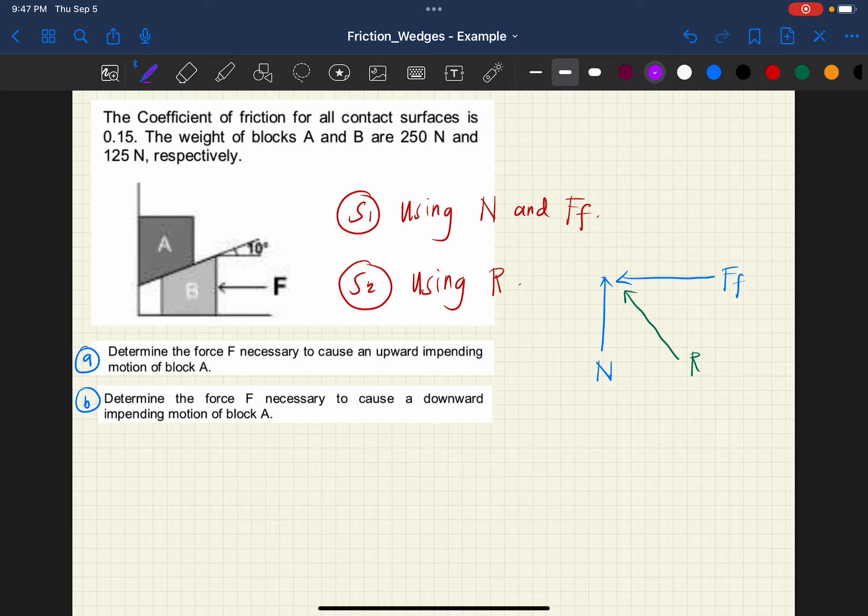Tandaan nyo, nag-e-exist yung resultant R na yan kapag meron kayong normal force na letter N. Ito yun, this is your normal force. Halimbawa, ito naman yung friction force nyo, this is your F sub f. Yung resultant ng normal reaction at saka ng friction force nyo ay nandito. At tandaan nyo class, nag-e-exist yan with respect sa normal force nyo, and meron siyang angle na angle phi, which is your angle of friction.

Yung ibang mga students dyan namamali, akala nila na yung resultant ng normal force at saka ng friction force na yan ay nag-e-exist with respect to friction force. Andito daw yan - that is wrong. Tandaan nyo class, na yung resultant ay laging nag-e-exist with respect sa normal reaction nyo or normal force. Okay? So gagamitin natin yung two solutions na to.

Ayan, pangit pala, alisin ko na. Anyway, let's analyze first yung problem natin. Medyo madugo yung problem na ganito, wedges - napakahaba kasi class talaga ng solution niya. Kaya i-introduce ko sa inyo yung mas maiksing solution, pero medyo kailangan nyo ng mabusising pag-analyze kapag gagamit kayo ng resultant. Pero mas maiksi talaga siya compared sa paggamit ng normal force at saka ng friction force. Pero tsaga-tsaga lang, masasolve nyo din naman siya.

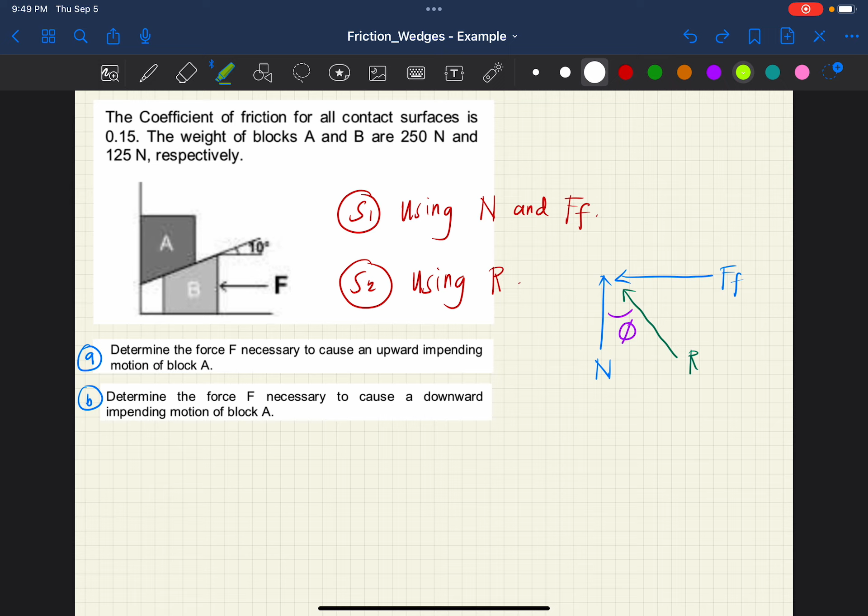Okay, so for this example, sabi dito, the coefficient of friction for all contact surfaces is 0.15. The weight of blocks A and B are 250 newtons and 125 newtons respectively. Ibig sabihin class ng respectively, magkasunod - kung ano yung unang ibinigay sa inyo, halimbawa yung block A, definitely siya yung merong weight na 250 newtons. Pangalawang ibinigay sa inyo, yung block B, definitely sa kanya yung 125 newtons. Ito yun, okay? So, ayan, hinighlight ko na.

For letter A, problem A, determine the force F necessary to cause an upward impending motion of block A. Ibig sabihin, hanapin daw natin yung value ng F na to, kung saan kapag itinulak niya yung block B, magkakaroon daw ng impending motion dito sa A na upward. Kumbaga, imagine niyo kapag tinulak ng F yan, yung block B, tataas yung block A na yan or wedge A na yan. Okay?

For letter B naman, determine the force F necessary to cause a downward impending motion of block A. Kumbaga, para bumaba yung block A na yan sa problem B natin, instead na patulak yung gagawin nyo sa F, babaligtad tayo ngayon. So pag-ganito yung force F nyo.

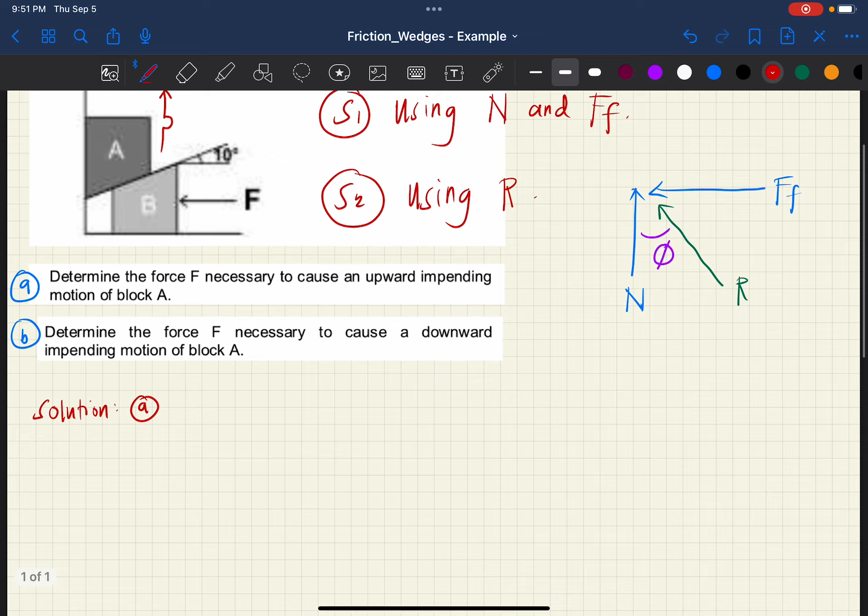Okay, so let's try. Unahin natin class yung problem letter A. So, solution for problem letter A. Solution A, o ayan. Imagine niyo class na itutulak ng force F na to, yung block B, tapos aangat yung block A na yan. I-expose natin lahat ng mga forces and frictions na nag-e-exist sa block A at saka sa block B, para mas madali yung pagsasolve natin. So i-drawing natin, sige. Ito yun yung block A. So ayan, drawing ko lang.

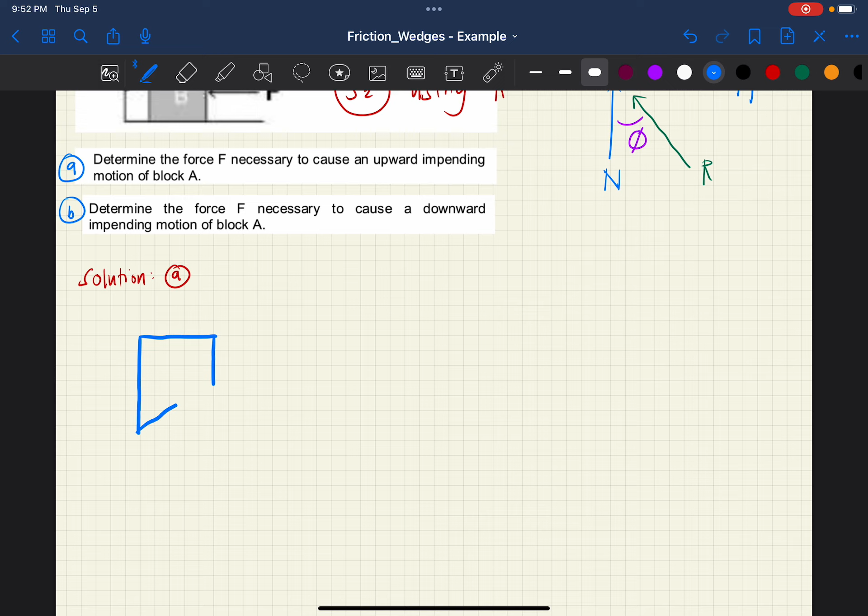Medyo habaan natin to. Tapos, ito yung block A nyo. Ayan, that's better. Tapos, nandito yung block B nyo.

Habaan natin para mas mukhang magsasalpak talaga sila. Ayan, this is your block A, yung nasa itaas. Imagine niyo class, kung pataas yung magiging impending motion niya or movement niya, sa tingin nyo, ano kaya magiging direction ng friction force niya? Kasi sa block A, dalawa yung contact surface nyo. Isa dito, at isa dun sa pagitan ng A at saka sa B. Whereas kapag tinignan nyo naman yung block B, ganun din. Isa yung contact surface niya sa baba at isa yung nasa pagitan ng block A at saka ng block B.

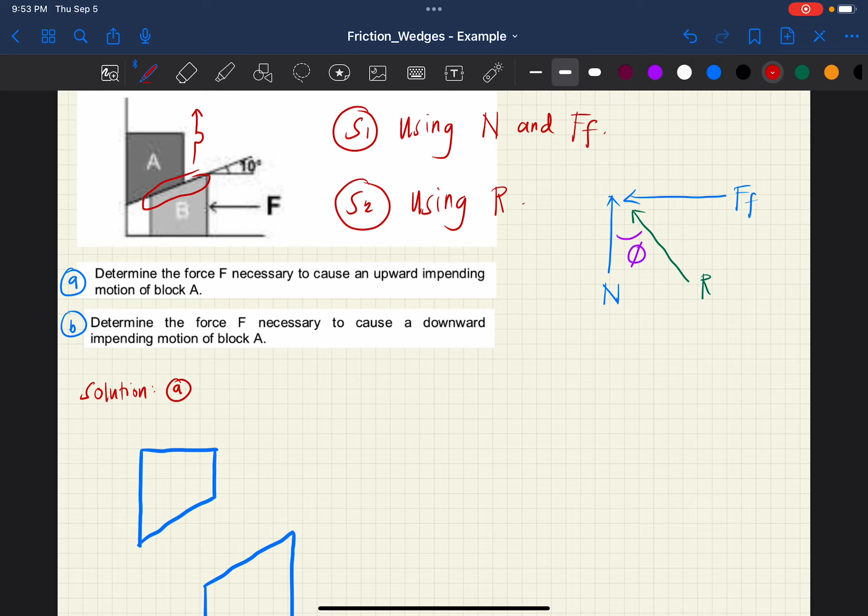Tandaan nyo, na ituro ko to sa mga students ko, kung ano class yung friction na nag-e-exist between yung nasa surface ng A at saka ng B, kung ano class yung friction na nasa A or nasa block A, paglipat nyo sa B, same friction lang yon pero opposite in direction.

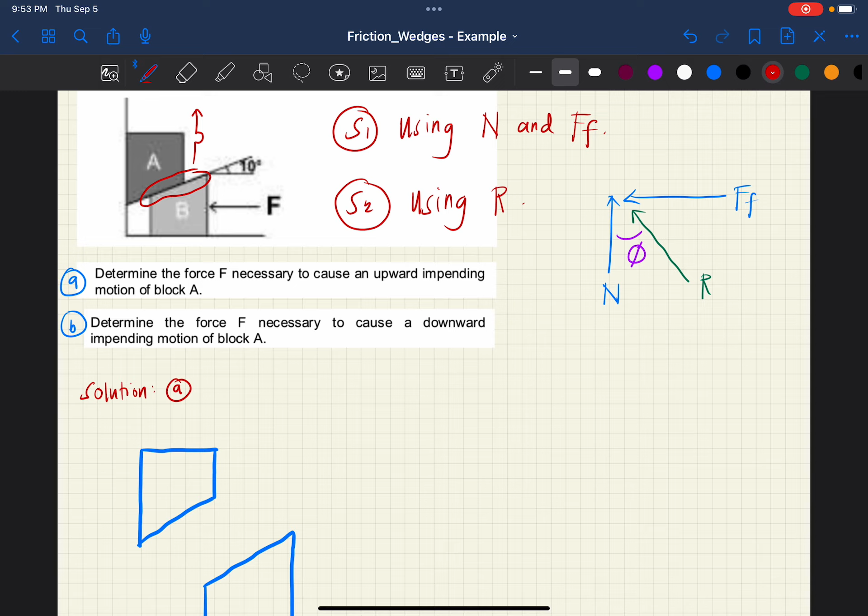So sige, ilagay natin, unahin natin pinakasimple. Pakilagay class yung normal reaction dito sa side ng A. Definitely, magkakaroon yan ng normal reaction na pag ganito. This is your, let's call this as your N1. Siyempre,

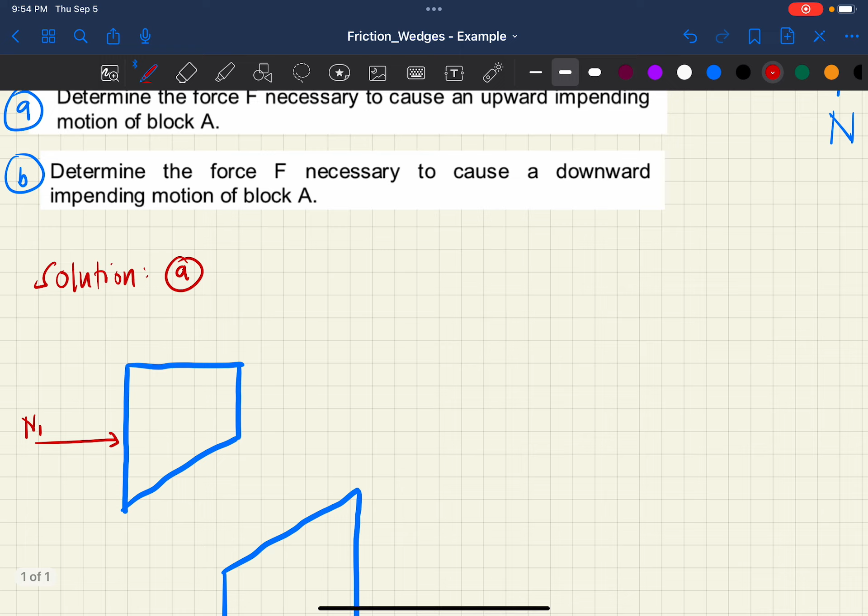kung pataas yung magiging movement nyo ng block A, so kung ang impending motion na to class is pataas, ito kasi yung impending motion niya, baguhin natin yung arrow. So pag ganyan, ito yung impending motion niya, pataas. Definitely, ano kaya magiging direction of friction force? Pababa. Let's call this as your F1. So ayan, let's call this as your F1 o small letter f na lang. That stands for friction 1.

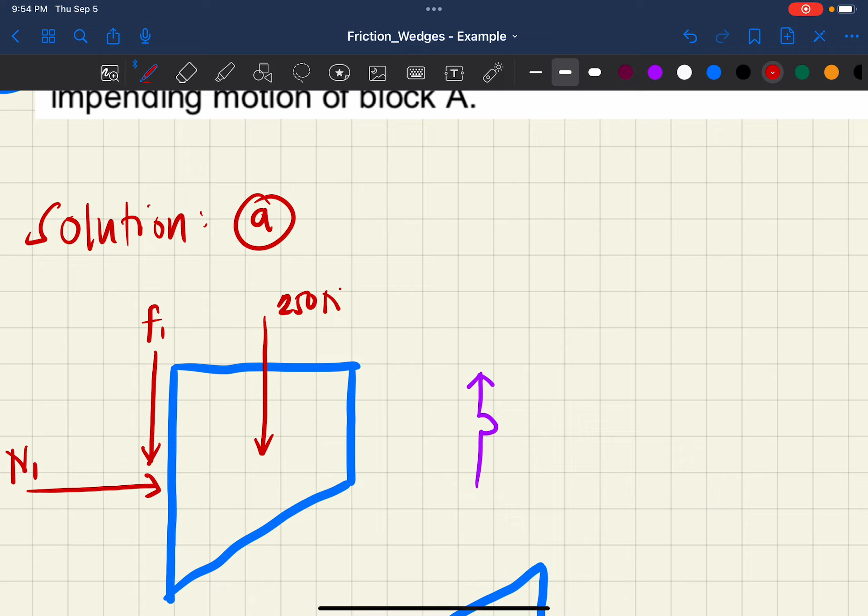Siyempre, hindi natin pwedeng kalimutan yung weight ng A, that is equal to 250 newtons. Next, syempre, kung tataas class yung movement ng block A nyo, definitely, ano kaya magiging direction ng friction force nyo?

Dito, sa pagitan ng A at saka sa pagitan ng B. Unahin natin dito sa surface at A. Normal reaction at A, between A and B, syempre perpendicular. Let's call this as your N2. Tapos, ilagay natin, i-project natin para hindi kayo malito. Kung pataas pala yung magiging movement ng block A, definitely class, magkakaroon yan ng friction force between the surface of block A and B. Let's call this as your F2.

Yan na. At syempre, kapag pinroject nyo rin ito, magkakaroon siya ng angle. Anong angle kaya dito? Ano yung angle na binigay? 10 degrees. So kapag pinroject nyo, this will be 10 degrees. Ito rin, this will also be 10 degrees.

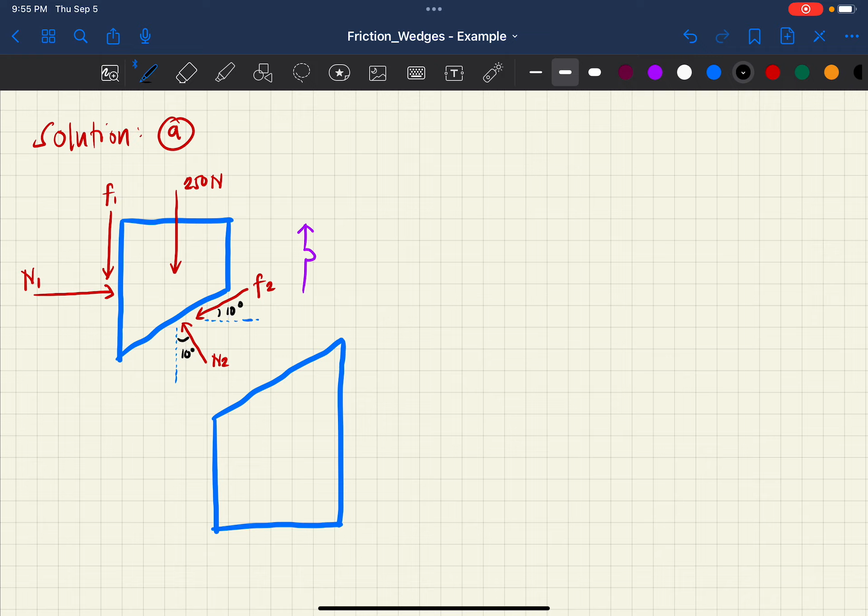Proceeding, meron pa ba na nag-exist dapat sa block A? So I don't see any, parang wala na. Lipat tayo ngayon dito sa block B.

Unahin natin yung normal force na nag-exist dito between the surface of block A at saka ng block B. Tandaan nyo, kung pataas ito sa surface A, definitely pag nilipat nyo yan dito, pababa na yan. Pero same, that this is N2.

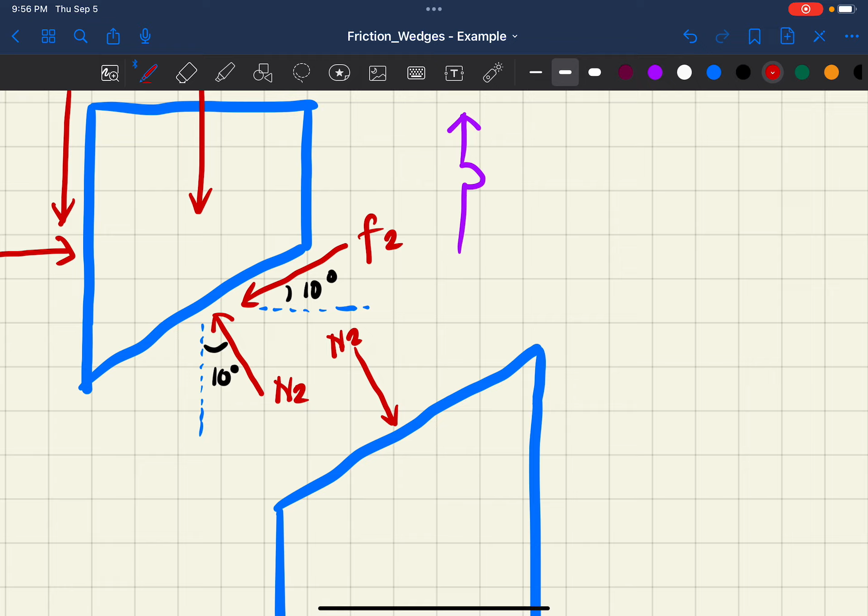At di ba, ang impending motion ng force nyo, since itutulak yan, itutulak ng force F. Yan, itutulak yan ng force F. Definitely, yung friction force nyo dito, F2, is magiging to the right. Kasi to the left, yung direction ng force nyo. Let's call this as your F2. Ayan na.

Siyempre, i-project din natin yung mga angles na meron dyan. Project nyo to pataas. And i-project nyo to horizontally. This will still be 10 degrees. And ito, ganun din, 10 degrees. Hindi nyo rin class pwedeng kalimutan yung weight ng block B, which is equal to, dito na yan, which is equal to 125 newtons.

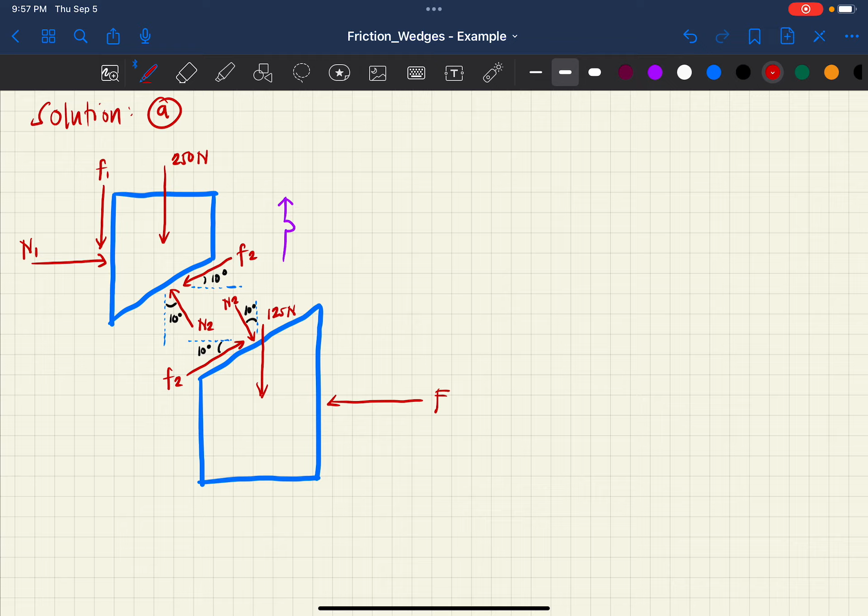Next, meron pang nag-exist dyan, hindi nyo lang nakikita yung force na nasa ilalim. Ibig sabihin, yung friction force at saka normal reaction na nasa ilalim ng block B. Since ito yung block A nyo, lagyan nga natin ng label, and this is your block B. Pagka in-expose nyo class yung forces, friction force at saka normal force na nag-aak sa ilalim ng block B nyo, definitely magkakaroon yan dito. Let's call this as your N3, normal reaction 3 na yan.

At since to the left yung force o applied force nyo, definitely yung friction force sa ilalim ng block B nyo is to the right. Let's call this as your friction number 3. O diba, ang saya, sobrang dami ng forces na yan. Pero lalabanan natin yan, so solvein natin yan.

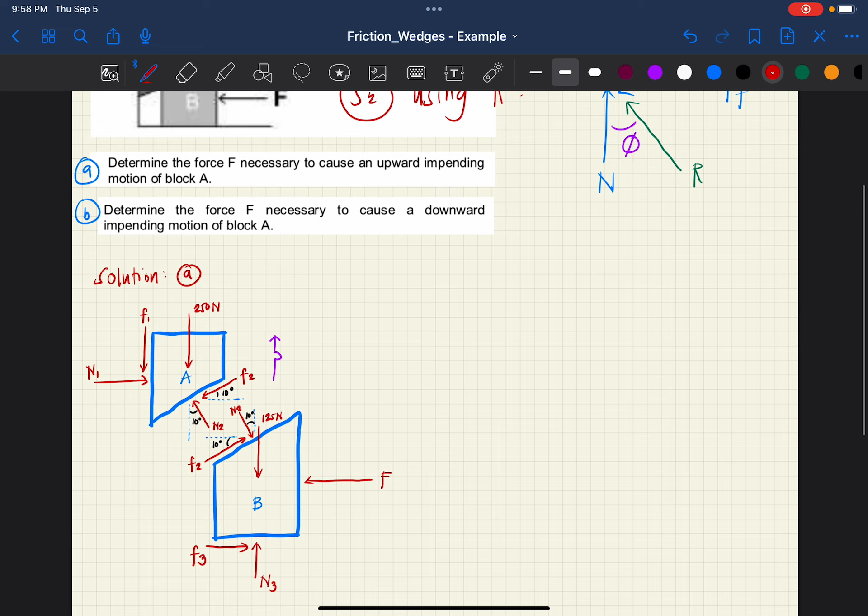First step na kinakailangan nyo gawin, hindi nyo naman kasi class pwede pagsabayin na FBD ng dalawa, gumamit tayo isa-isa lang. Unahin natin class, FBD muna. At block A muna tayo. Kasi syempre, pataas, papababa yung gagawin natin at block A. At saka kung mapapansin nyo, mas kakaunti yung mga forces na nag-act.

Parang parehas lang pala. I mean, oh yes, mas konti pala yung forces na nag-act sa block A kasi wala naman sa kanya yung force F na yan. So, definitely, sa block A tayo mag-i-start.

At block A, taking summation ng forces along x-axis is equal to 0. So, paki-note class na nasa block A lang tayo. Mag-focus tayo sa block A only. Ano-ano class yung mga horizontal forces na nag-act dyan? Ang gagamitin natin na x-axis is pag ganito, x and y-axis. Yung normal lang, this is your y-axis and this is your x-axis. Okay? So, para hindi kayo malito.

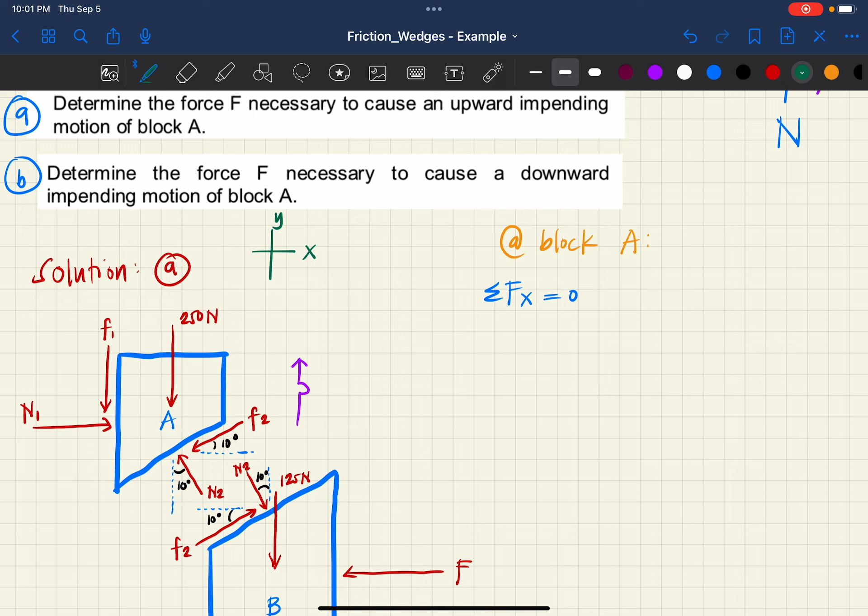Pero, there are instances na pwede nyo kasi class gamitin yung x and y axis na nakapaganyan. Pero in this instance, mas madali kung gagamitin natin yung usual lang or yung normal lang.

So, sige. Ilagay nyo class lahat ng x forces na nag-act sa block A. Unahin natin N1. So, nakikita ko positive N1 yan. Next, minus F2, sine or cosine? Negative F2, that is cosine 10. Next, ano pa? Yung N2. That is negative kasi upward to the left yan. So, this is minus N2, and that is sine 10 degrees. Meron pa ba? So, parang wala na.

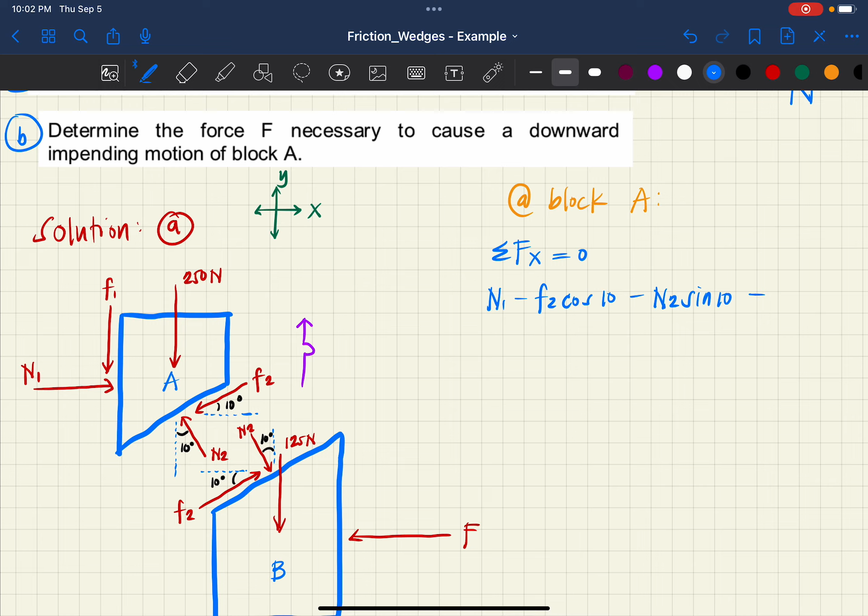Is equal to 0. Tandaan nyo na ang formula ng friction force natin or pagkuha ng friction force natin, F of F is equal to mu n. So, ito class yung formula na kinakailangan nyong tandaan and hindi pwedeng kalimutan sa friction.

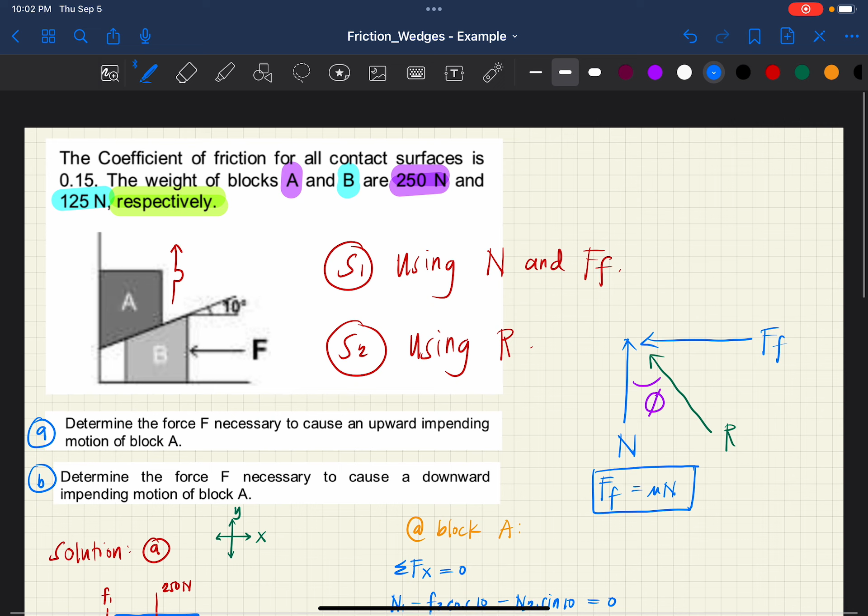So, palitan nyo to class, that this is N1 minus F2. Palitan nyo class. Ano yung coefficient of friction natin? Sabi, 0.15 sa lahat daw ng surface. So, palitan nyo to. This is now 0.15 N2 cosine 10 minus N2 sine 10 is equal to 0.

Simplifying, combining like terms, paki-combine class yung dalawang N2. This is now equal to N1. Pag-combine niyo class yung dalawang equations na merong N2. So, pag-combine natin, this is now equal to negative 0.15 cosine 10 minus sine 10. So, ayan. This is now equal to negative 0.3214. Ayan. Negative. So, lagay ko lang. This is negative 0.3214. And then, N2 is equal to 0.

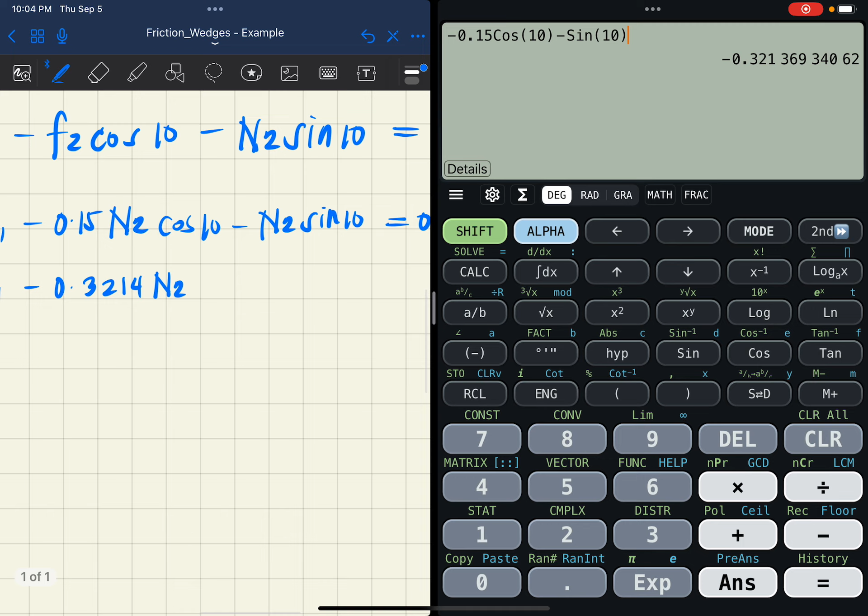Since dalawa pa rin yung unknowns nyo, isang N1 at saka isang N2, let's denote this as equation number 1. Ayan. So, lagay ko, palitan ko na lang ng arrow. Let's denote this as equation number 1.

Next, taking summation ng forces along y-axis tayo, still under block A tayo. Ayan. Ilagay nyo class lahat ng forces na nag-act in y-axis. Unahin natin class yung N2. Positive kasi upward yan. Therefore, that is N2. Tapos, sine or cosine? This is cosine 10. Nakikita ko cosine 10 yan.

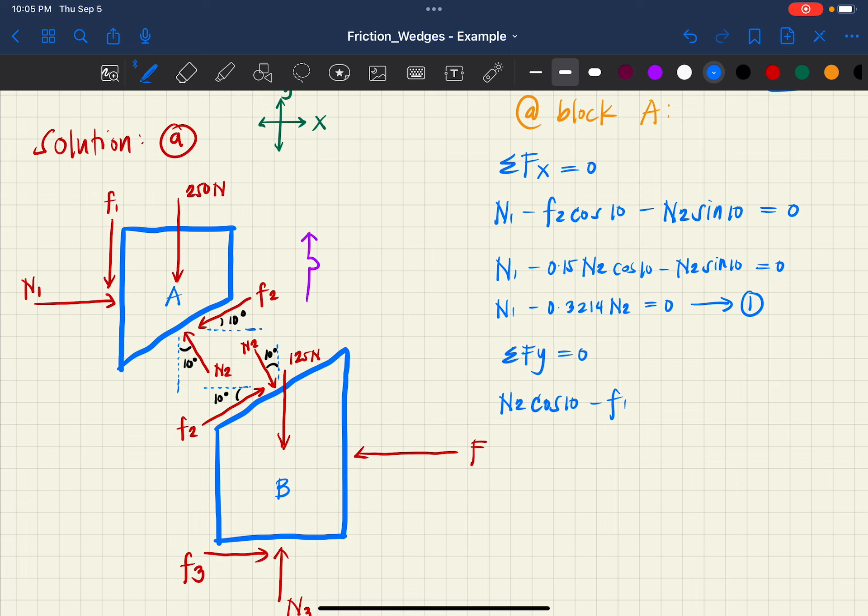Next, what about yung F1? That is negative F1 kasi downward yan. Yung 250, that is negative 250. Ano pa? Yung F2, negative F2. And that is sine 10 degrees. Meron pa ba? Parang wala na. 1, 2, 3, 4. Apat lang yan is equal to 0.

Simplify, tapos palitan nyo class yung F1 at saka F2 ng mu n para ma-expose natin or matira na lang sa equation nyo is N1 at saka N2. So, therefore, N2 cosine 10 minus, this is 0.25 or 0.15 pala, 0.15 N1 minus 250 minus 0.15 N2 sine 10 is equal to 0.

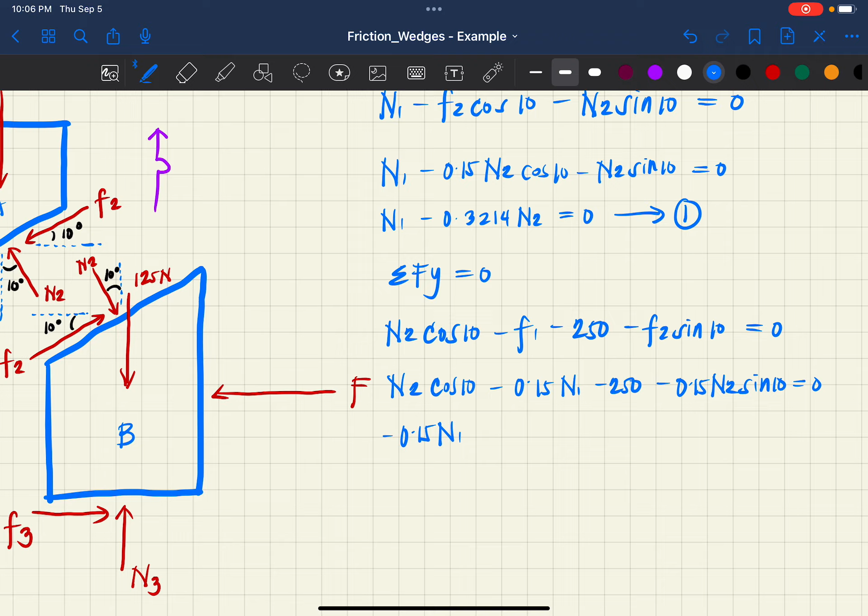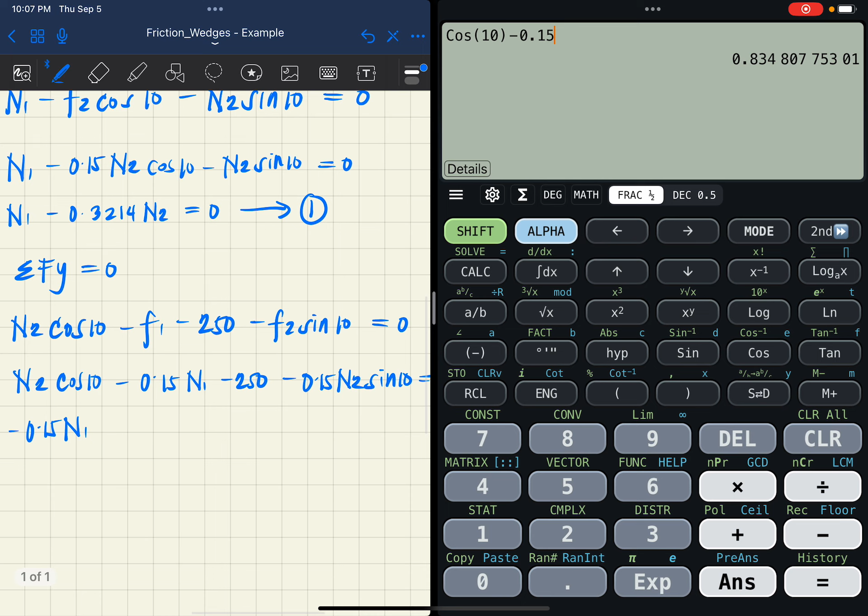Combine like terms, kagaya ng ginawa natin kanina. This is now equal to negative 0.15 N1. Pag-combine niyo class yung dalawang N2 natin, that is cosine 10. Yung coefficients lang ilagay nyo ha, cosine 10 minus 0.15 ng sine 10. That is 0.9588. This is positive 0.9588 N2. Tapos ilipat nyo class sa kabilang equal sign, sa kabilang side ng equal sign, yung 250. This now becomes positive 250. Since dalawa pa rin unknowns nyo, let's call this as equation number 2.

Alam ko, tinuro ko na sa inyo, specifically sa mga students ko, kung paano mag-solve ng equations 1 and 2. So, using mode equation, using equation 1 and equation number 2, mode, pindutin nyo class sa calculator nyo, mode equation, and then 2 unknowns.

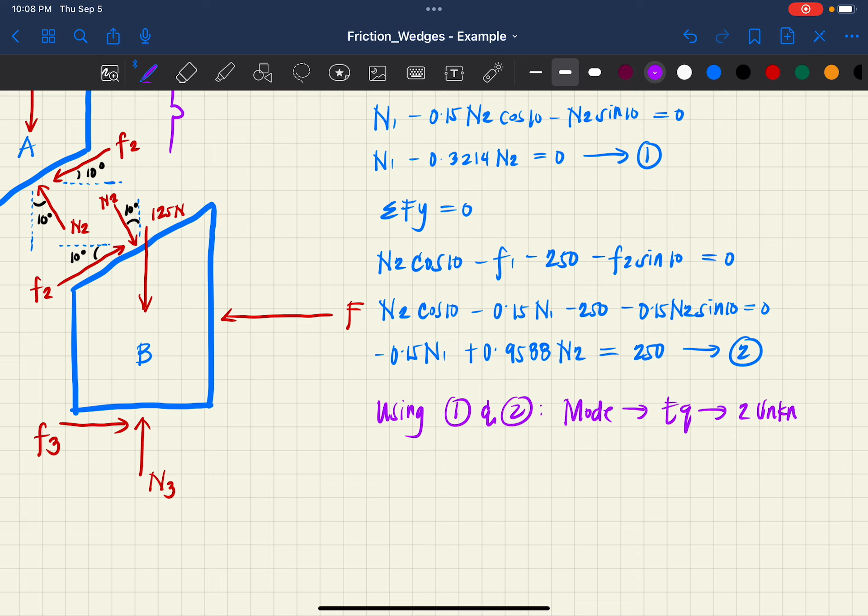Ayan, 2 unknowns. So paano gagawin nyo? Pindutin nyo class muna yung calculator nyo, mode equation, 2 unknowns. So gagawin ko rin dito, asa ng mode? That is mode equation. Ito, solve system equations, 2 unknowns.

Kunin nyo class yung equation number 1 at saka equation number 2 nyo. Dapat tapat-tapat yan. Unahin nyo class yung coefficient ng N1. Andito tayo. Ang coefficient ng N1 is 1 equals. Ang coefficient ng N2, ilagay nyo yung lahat na yan, negative 0.3214 equals. And then yung constant, 0 equals.

Next, equation number 2, ito yun. Coefficients lang din. Negative 0.15 equals, positive 0.9588 equals, and then yung constant, that is positive 250. Equals nyo, ang lalabas sa N1 that is 88, nalagay ko.

N1 is equal to 88.2395. What about N2? Equals nyo ulit, bibigay yung susunod, that is 274.5473. Ayan, newtons. Parehas newtons yan. So, newtons.

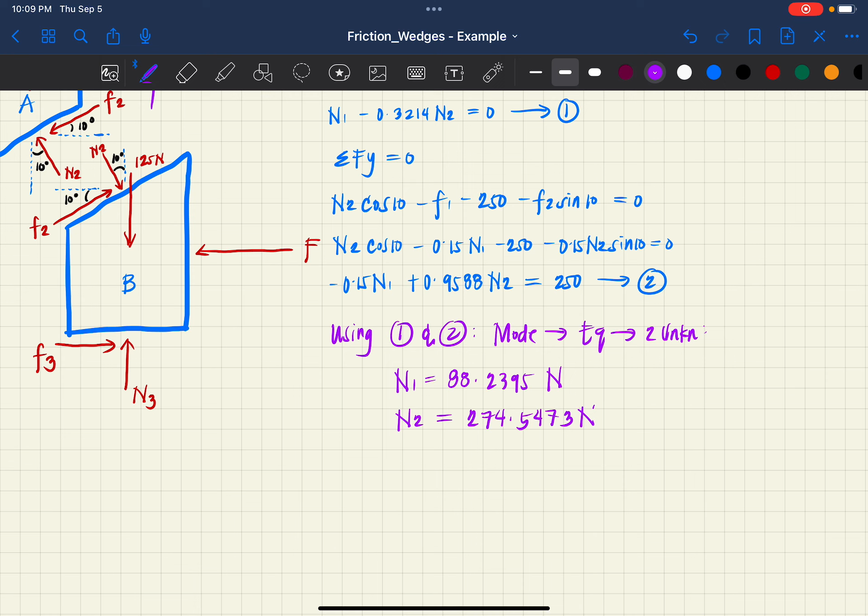So ayan, nakuha na natin N1 at saka N2. Pwede na tayo class mag-proceed sa block number 2 or block B. So sige, at block B na tayo. Dito tayo, medyo mahaba kasi ito.

At block B, ayan. Ganun pa rin, taking summation ng forces along y-axis muna tayo, equal to 0. Ano-ano kaya class yung mga y forces na papasok under block B? Block B lang yung pakialaman nyo. Mamaya tayo sa A ulit sa problem B. Pero tingnan kayo sa block B, ano-ano yung mga y forces na nandyan.

Unahin natin yung N3, that is positive N3. Yung N2, negative yan, that is negative N2, and then this is cosine 10 degrees, kasi downward na siya eh. Diba? Yung weight na 125, negative 125. Yung F2 natin, that is positive F2, and that is sine 10 degrees na to.

Meron pa ba? So 1, 2, 3, at saka 4. Apat lang naman yan, so wala na. This is now equal to 0. Since may nakuha na tayong value ng N2, palitan nyo na class yung N2 na yan at saka yung F2 na yan. Okay? This is now equal to N3 minus 0.15.

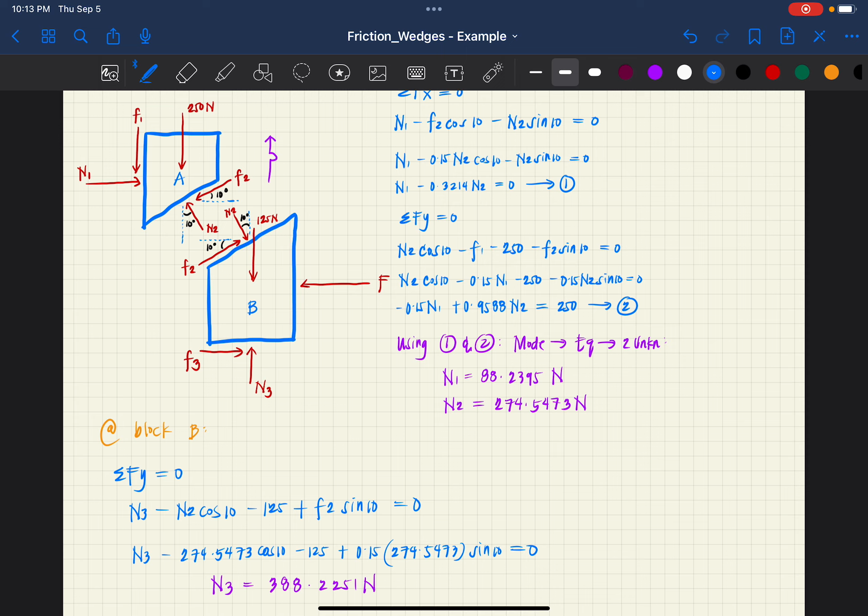Along x-axis na tayo, equal to 0. Nakikita nyo na ba yung mangyayari? Papasok na class dyan yung F, and by that, pwede masasolve na natin yan kasi meron na kayong normal reaction 3. Ano-ano yung mga y-x forces na papasok at block B pa rin tayo?

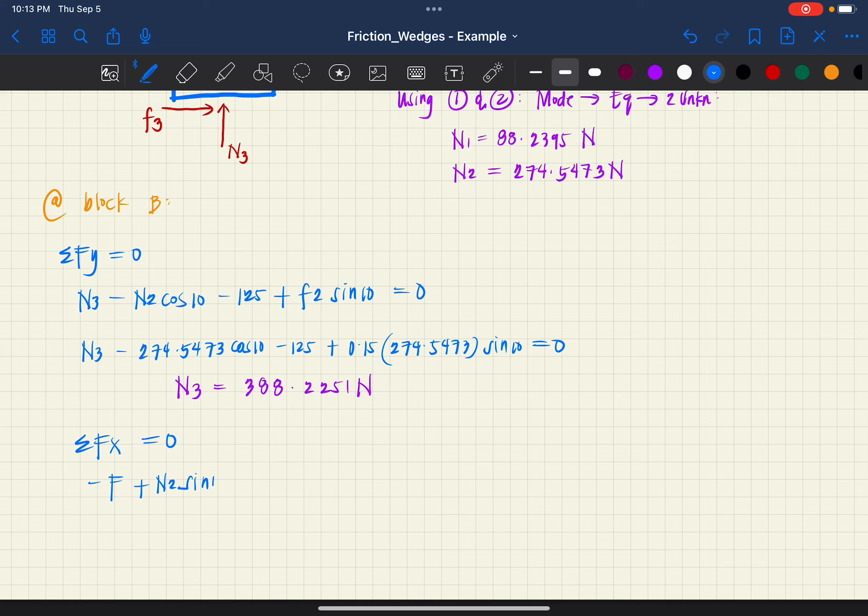Unahin natin F, that is negative F. Next, yung N2, positive, that is positive N2, and that is sine 10. What about yung F2? Is still positive yan kasi upward to the right yan, to the right pa din yan, that is positive F2, and that is cosine 10.

Next, yung F3 natin, that is positive F3. Meron pa ba? 1, 2, 3, 4. Therefore, this is now equal to 0. Substitute nyo class lahat ng mga alam nyong values. This is negative F plus what is N2 na nakuha nyo? Ito. This is 274.5473 sine 10 plus F2, that is 0.15 N2.

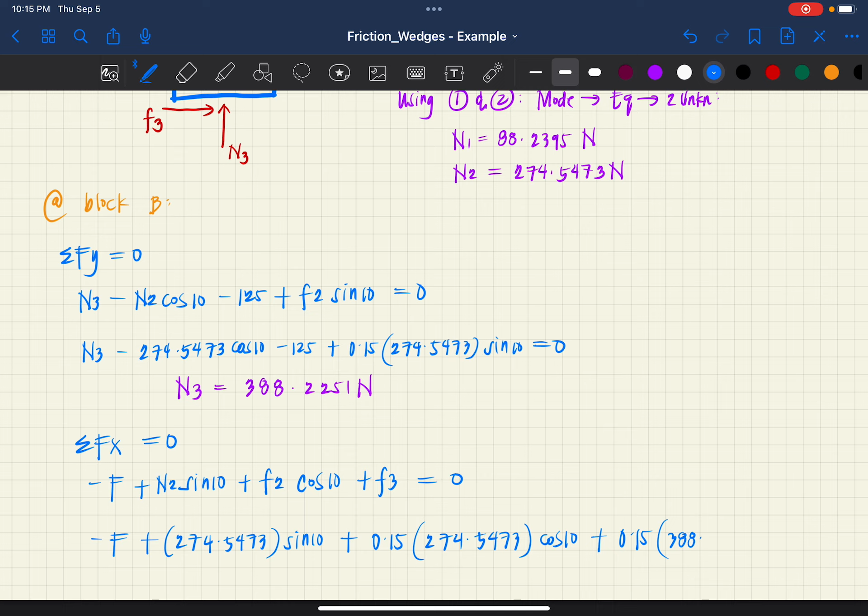What is N2? Ito yun. Still 274.5473 cosine 10, and then plus F3 is still 0.15 yan, pero this time N3 na kasi F3 na yan. 388.2251 is equal to 0.

Lipat tayo. Therefore, what is F? F is equal to calci ulit. Medyo mahaba yan. Calci nyo, lipat nyo class yung F kasi negative siya. Tapos iwanan nyo lahat yan para sa F. And then input nyo as is.

274.5473 sine 10 plus 0.15 times 274.5473 cosine 10 plus 0.15 times 388.2251. Ayan. Therefore, force F is equal to 146.4649.

So therefore, F is equal to 146.4649, and this is newtons. Ito class yung final answer natin. This is your final answer.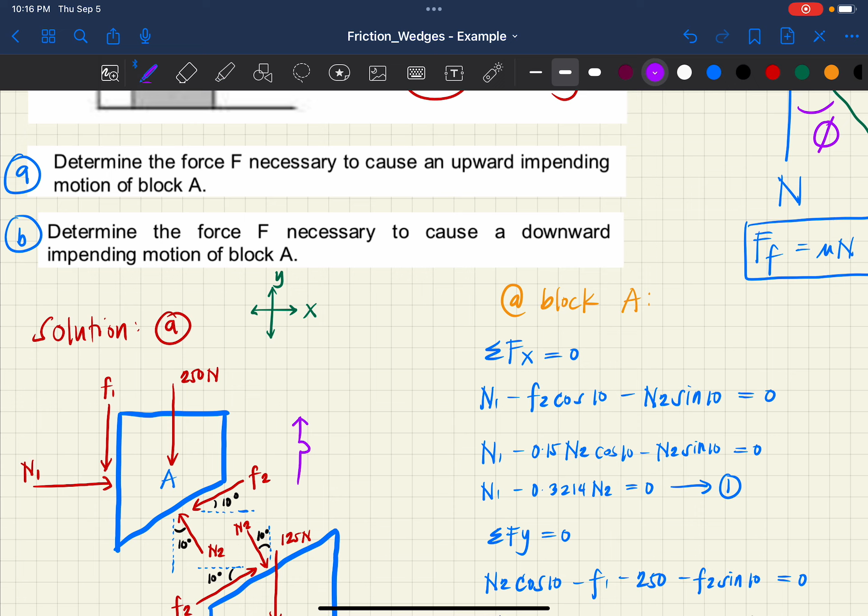This is for solution number 1. Solution number 1. Let me place it here. Solution 1, S1. There, that's okay.

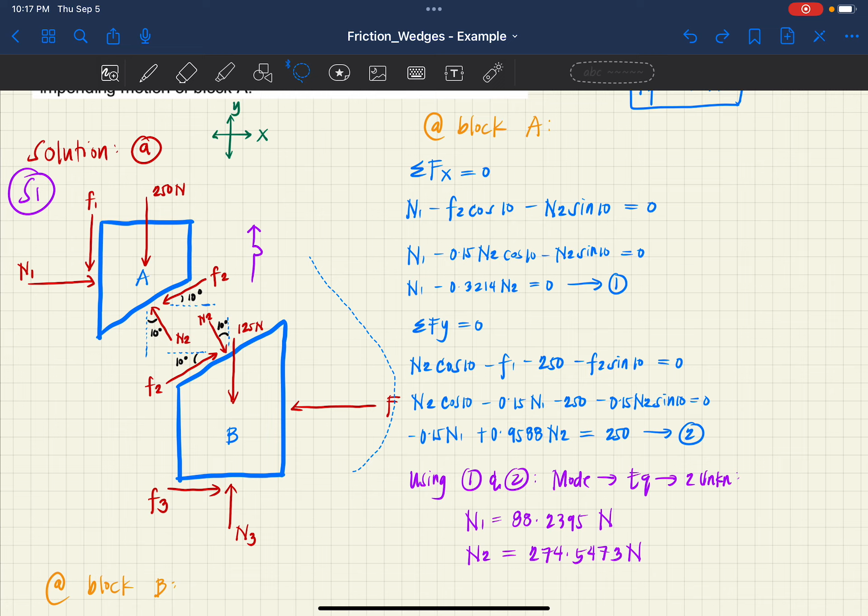For solution number 2, using resultant R, using resultant of N and friction force. For solution number 1, we used N and F of F. Let me bring this down so I can note it too.

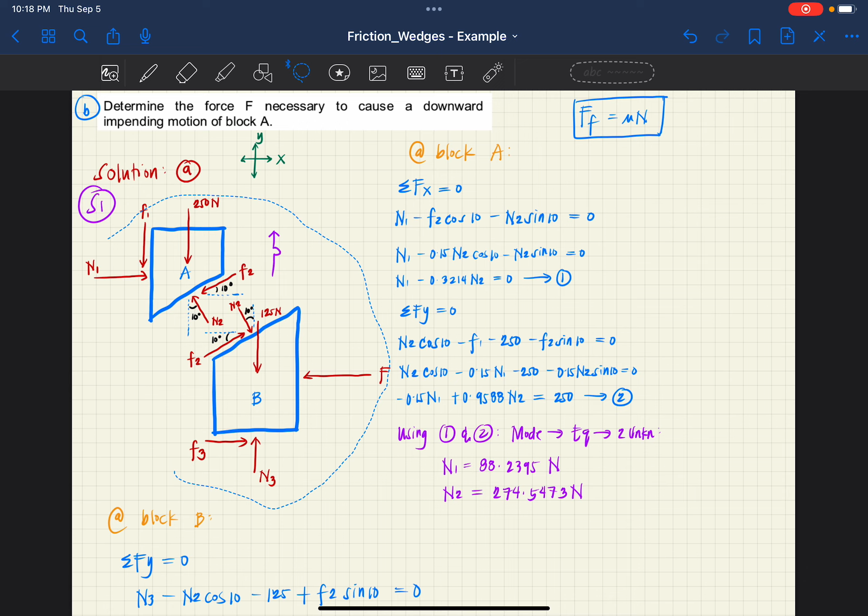Oh, this wasn't included. There, that's done. Using N and friction force, F of F, there. In this case, we need to redraw it.

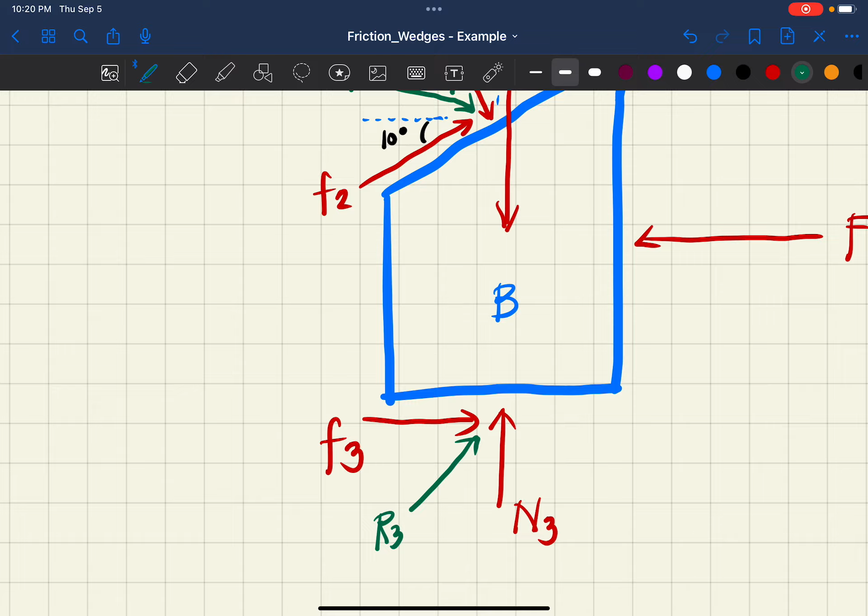If you listened last time to our discussion, I discussed that the formula for getting the friction force, if the coefficient of friction is not given, is tangent of angle phi equals coefficient of friction. Therefore, you can rearrange it, so to get angle phi, it is now equal to inverse tangent of the coefficient of friction.

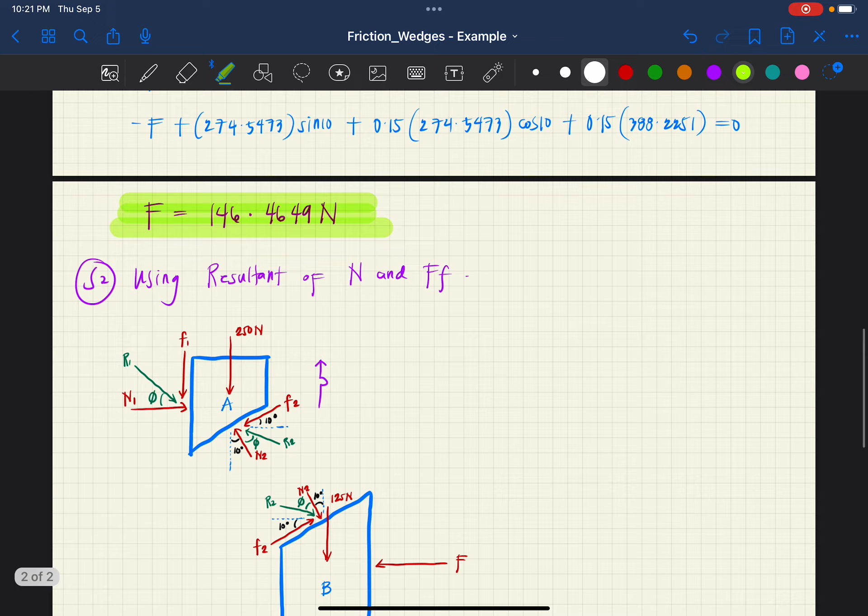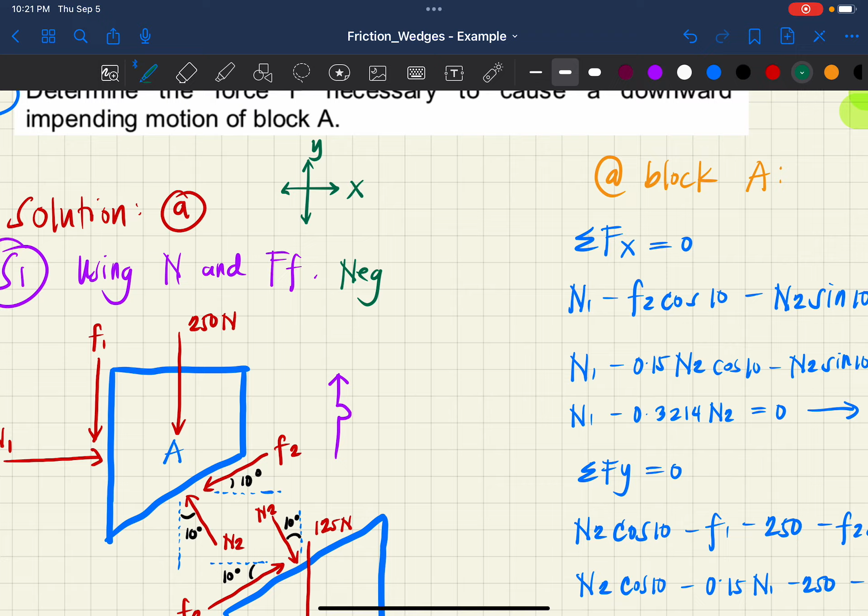Here, on the other hand, neglect the R, neglect the resultant first. So, let's go back here. First things first, to get angle phi, let's place it in between them. To get angle phi, the formula is inverse tangent of the coefficient of friction.

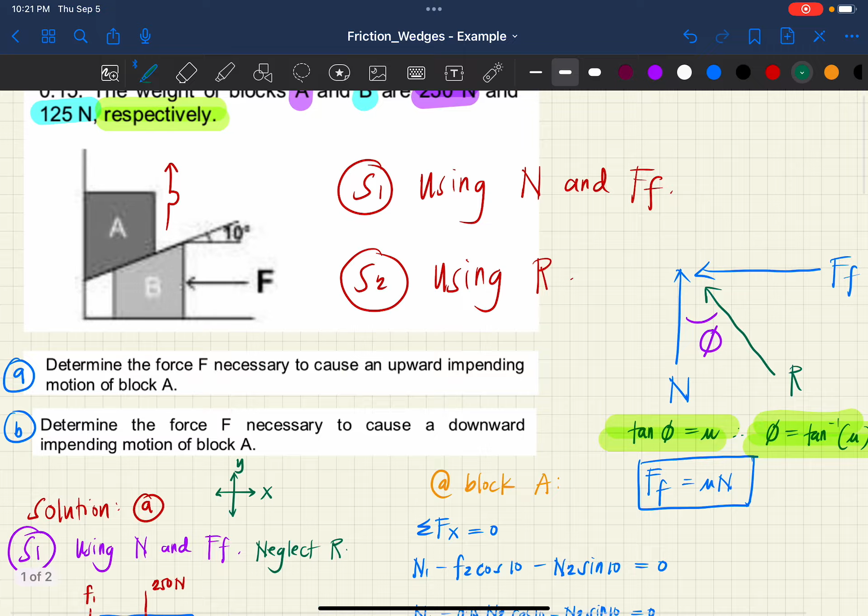You already know the coefficient of friction given in the problem, that is 0.15 for all contact surfaces. We'll prove that the final answer should be the same. If there's any discrepancy, it should only be in the decimals. Inverse tangent of 0.15, therefore angle phi is now equal to, let me get the calculator.

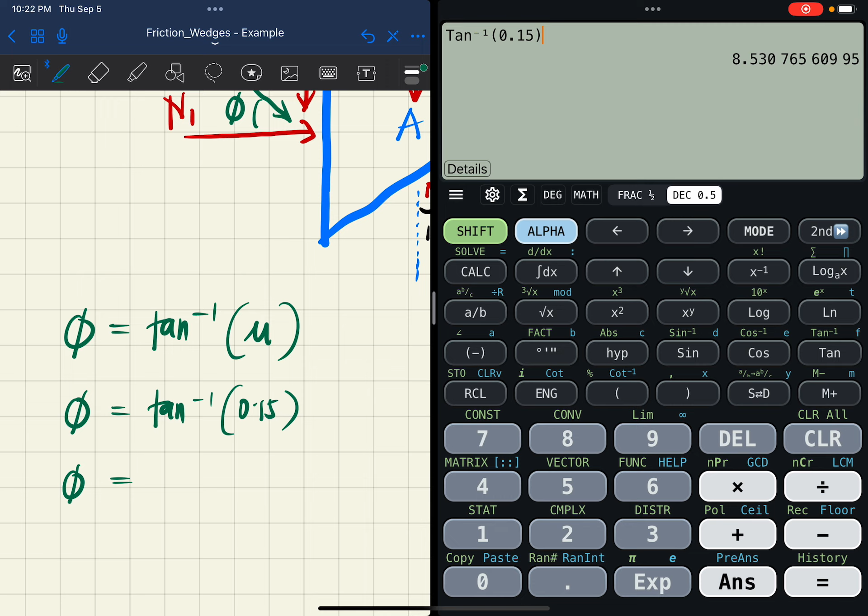So this is shift tangent of 0.15. This is 8.5308 degrees. Actually class, you can use just 2 decimal places.

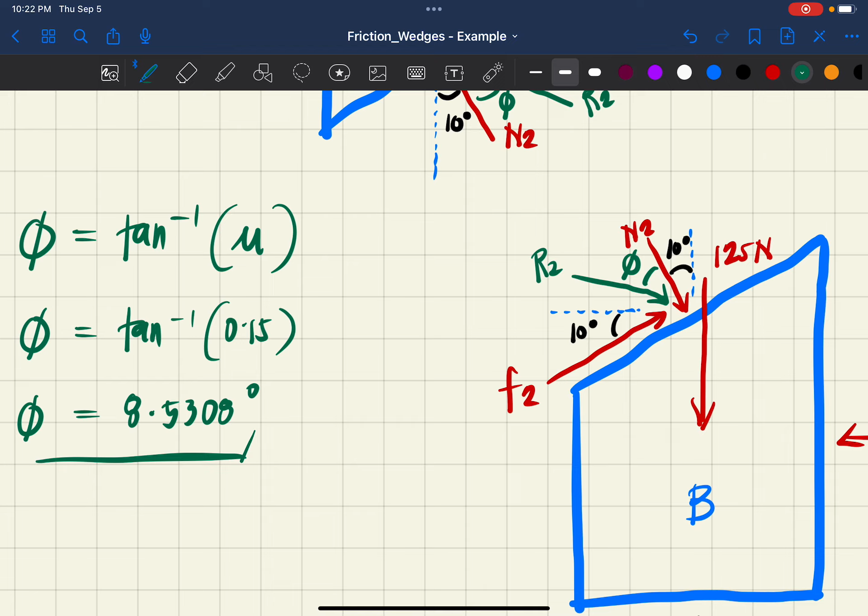We're still on block A. Instead of using the normal force N and the friction force F, small letter F, or F of F, what we'll use this time is R1 and R2. So, block A first. Let's start with block A.

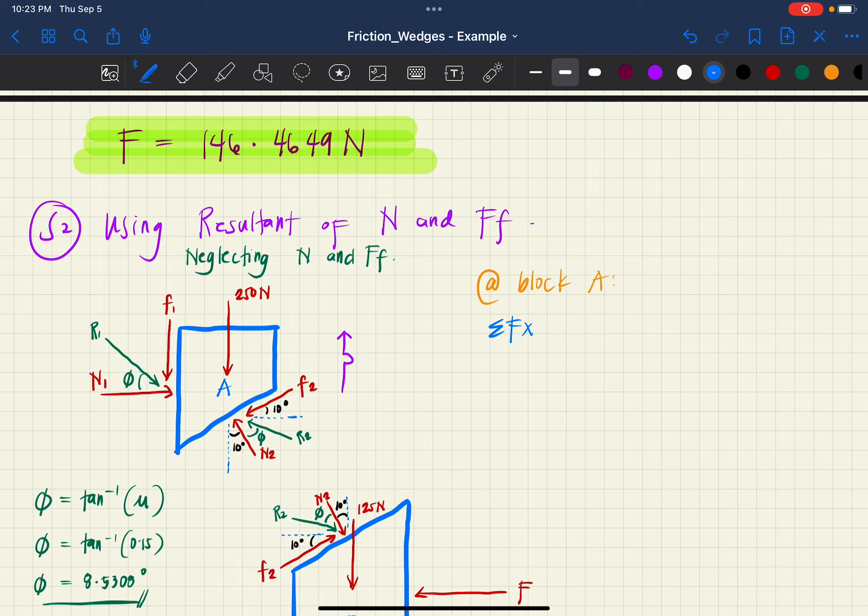At block A, taking summation of forces along the x-axis is equal to 0, or y-axis, whichever you want to start with, class. It doesn't matter, kasi masasolve nyo rin naman yan. Ano-ano kaya class yung mga x-forces na nag-a-act dyan?

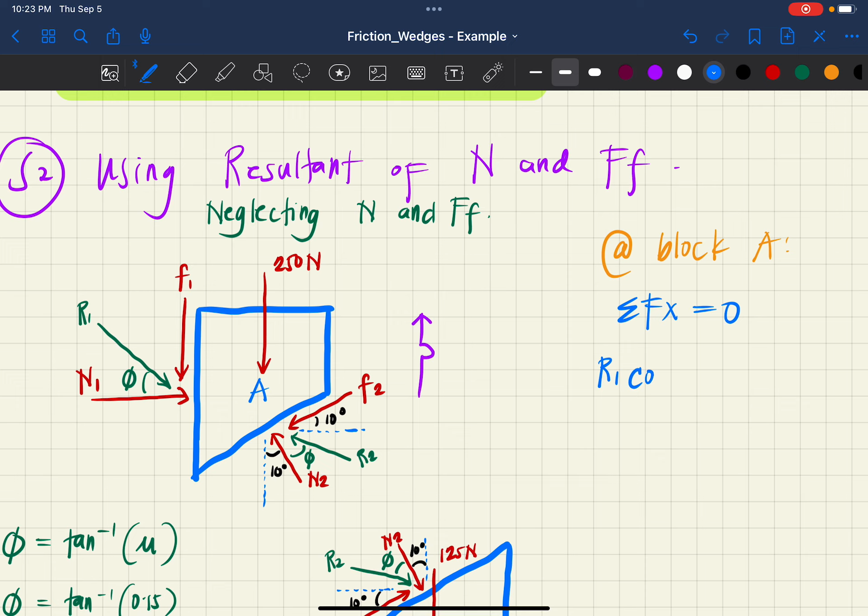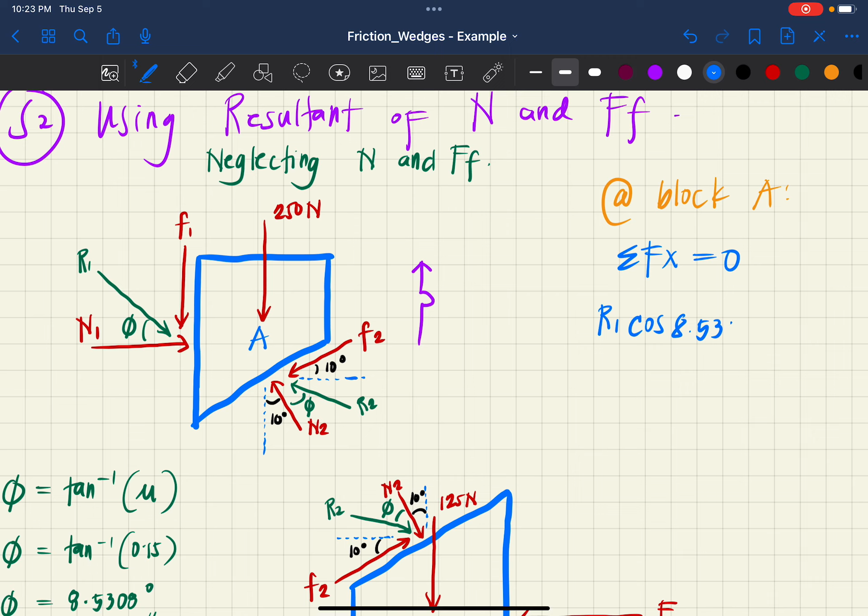So unahin natin yung R1. That is positive kasi to the right yan, R1. Tapos yung angle niya, sine or cosine? Ang nakikita ko is cosine phi. Ano ba ang cosine nyo? Ano ba ang phi nyo? Cosine 8.5308. Or ilagay na lang natin na cosine phi, mamaya na lang natin i-input sa calculator. So ayan, next.

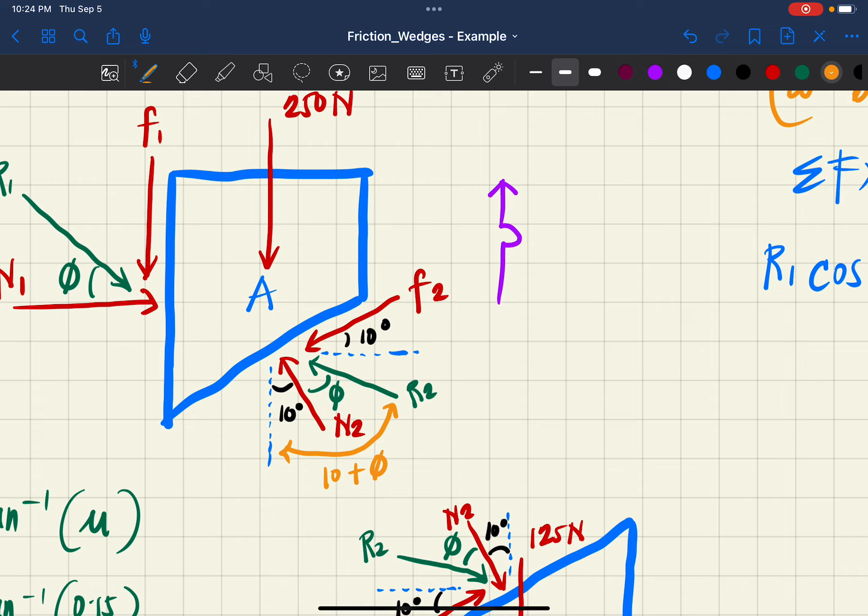Yung R2, R2 na lang papasok dyan kasi neglect na nga class yung N2 at saka yung F2. Huwag nyo nang pansinin yan. R2 na lang. Pero tandaan nyo, kapag kinuha nyo yung horizontal component niyan, ang angle niyan buo, eto, and this is equal to 10 plus angle phi. Okay? So ayan yung angle niya. Medyo dun lang siya nakakalito, pero at the same time mas maiksi siya. This is minus R2 sine or cosine.

So ang nakikita ko is sine. Sine ng angle phi plus 10 degrees is equal to 0. O, di ba? Kung i-compare nyo kanina, nung nag-block A tayo, ang nag-exist dyan, 3. Pero nung sinimplify nyo, 2 na rin siya. Pero in this case, 2 lang talaga siya. Since wala kayong nakuha, let's call this as equation number 1. Ganyan siya, very direct to the point lang.

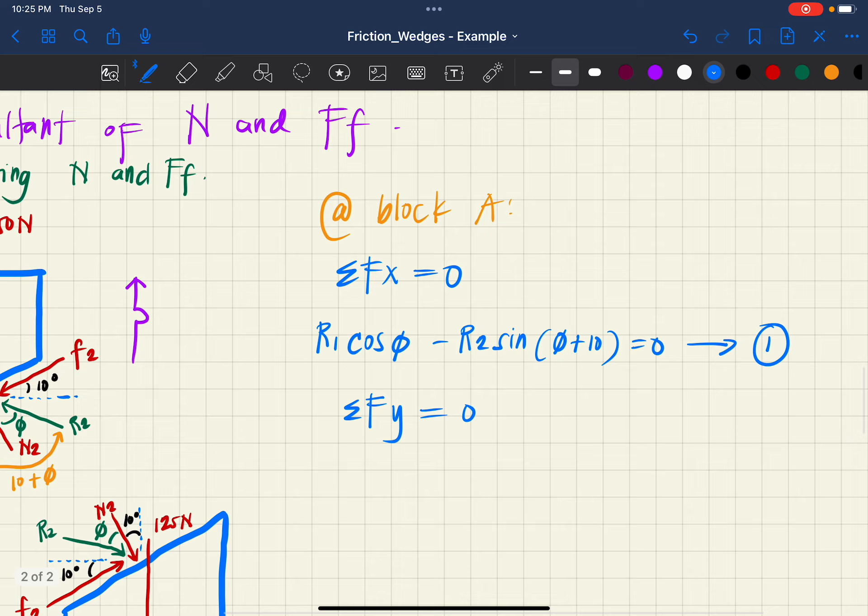Next, taking summation of forces along the y-axis is equal to 0. Ganun pa din, ang i-consider lang natin R1 instead of N1 at saka F1, tapos lahat ng other vertical forces. R1, that is negative. R1, in this case, this is sine phi 250, that is negative 250. R2, that is positive kasi upward na yan. Positive R2. And in this case, this is cosine phi plus 10.

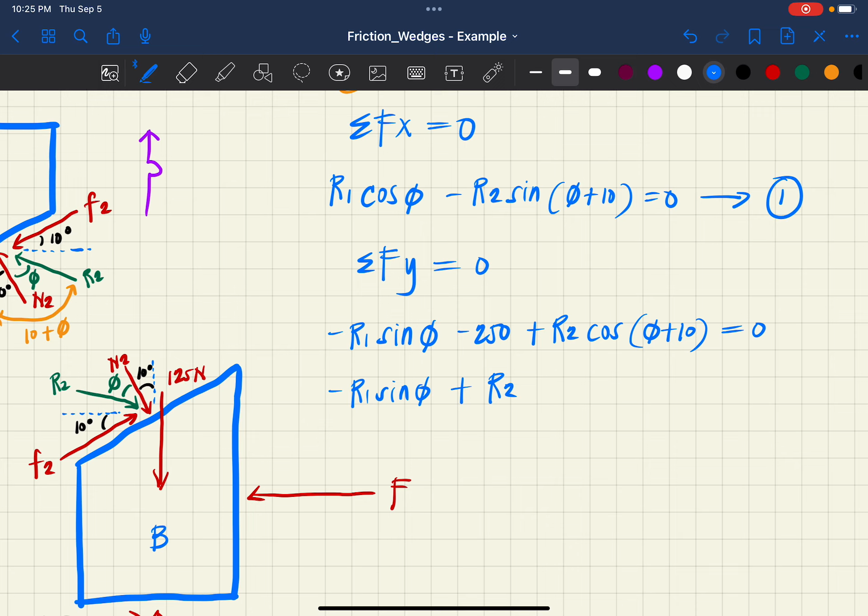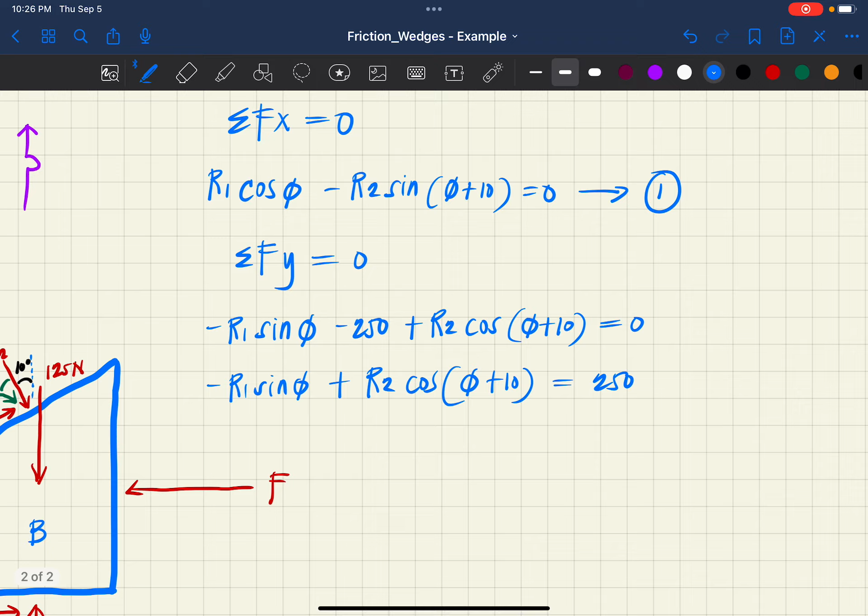And this is equal to 0. Simplifying, rearrange nyo, tapos ilagay nyo sa kabilang side ng equal sign yung constant. This is now equal to negative R1, tapat-tapat, sine phi plus R2 cosine phi plus 10 is equal to positive 250. Let's call this as equation number 2.

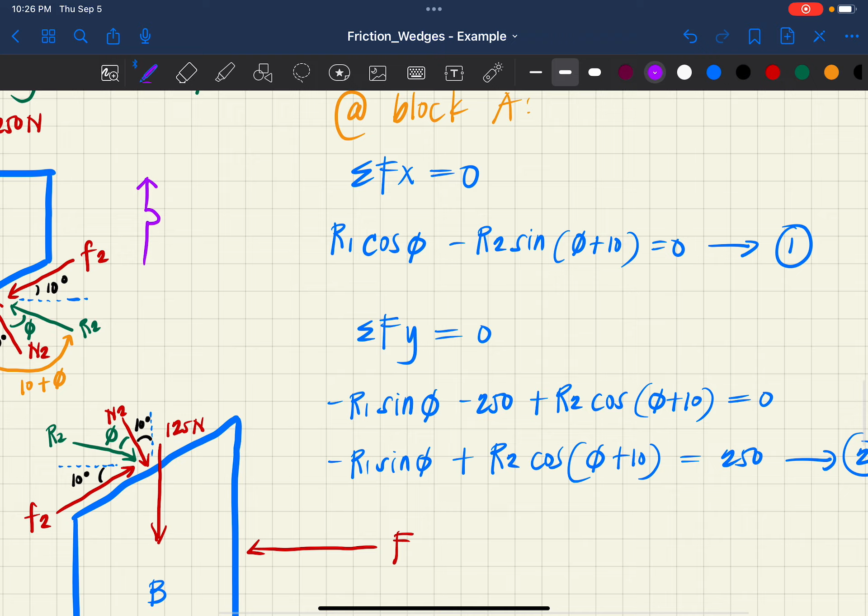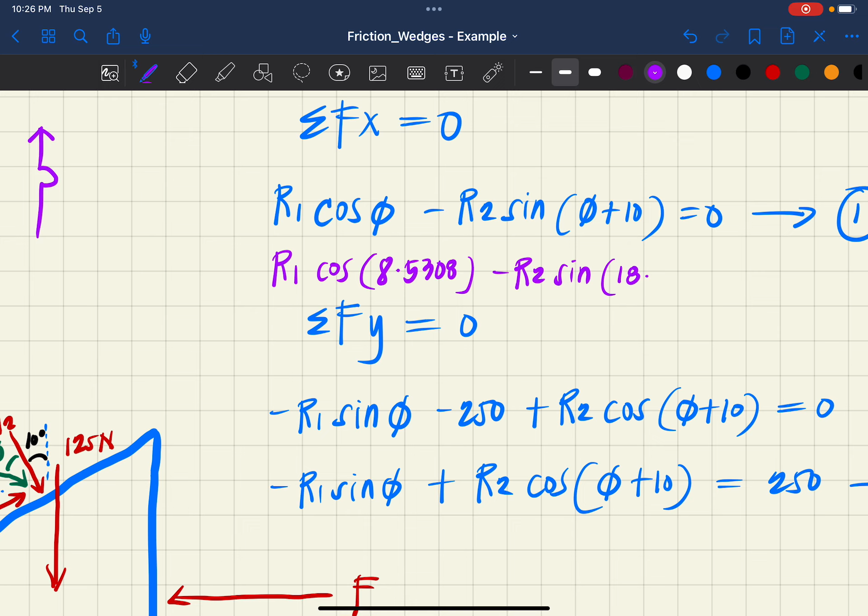Ayan, since meron na kayong equation 1 at saka equation number 2, ang gawin nyo class, pwede nyo namang palitan yung angle phi na yan. So ibaba natin ng konti. For equation number 1, ilagay nyo na, this is now R1 cosine yung angle phi nyo, that is 8.5308, minus R2 sine, what is 8.5308 plus 10? This is 18.5308. Lagyan ko ng 0 ko. Ayan, is equal to 0. Ito class yung equation number 1 nyo.

For equation number 2, ganun din, input nyo lang yung angle phi na nakuha natin. Negative R1 sine 8.5308 plus R2, copy that, and this is cosine 10 plus angle phi is still 8.5308 is equal to 250. And this is your equation number 2.

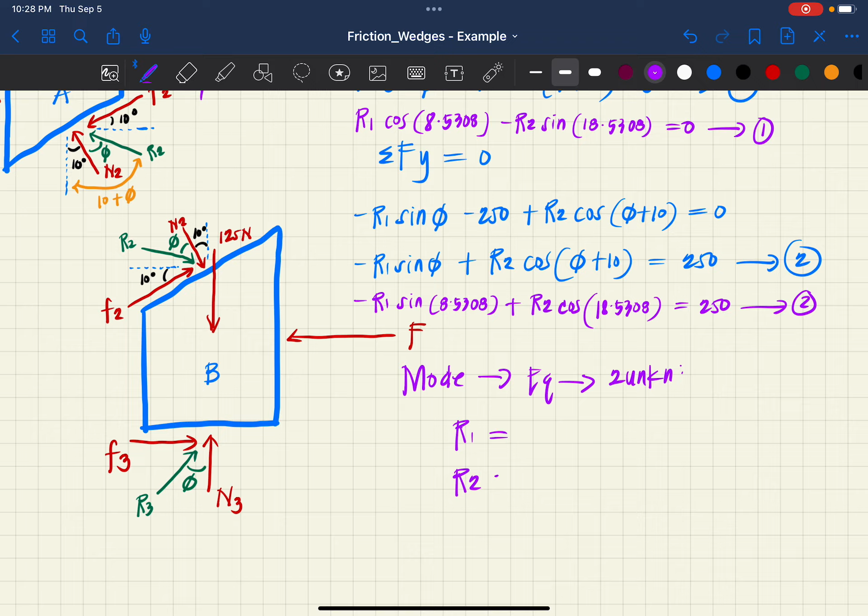Pero sa totoo lang, kung alam nyo naman class yung angle phi nyo, kahit hindi nyo na ilagay na ganyan kagaya ng ginawa ko, pinakita ko lang. Pindutin nyo class, this is mode, equation, and then two unknowns. Bibigyan kayo ng R1 is equal to, and bibigyan kayo ng R2 that's equal to what? Kunin nyo ulit yung mga calculator nyo, pakipindot, mode, equation.

So solving, ayan. Coefficients, equation number 1 muna tayo. Coefficient, that is cosine 8.5308 equals. For R2, that is sine 18, negative. Negative yan class, negative sine 18.5308 equals. And then yung constant, that is 0.

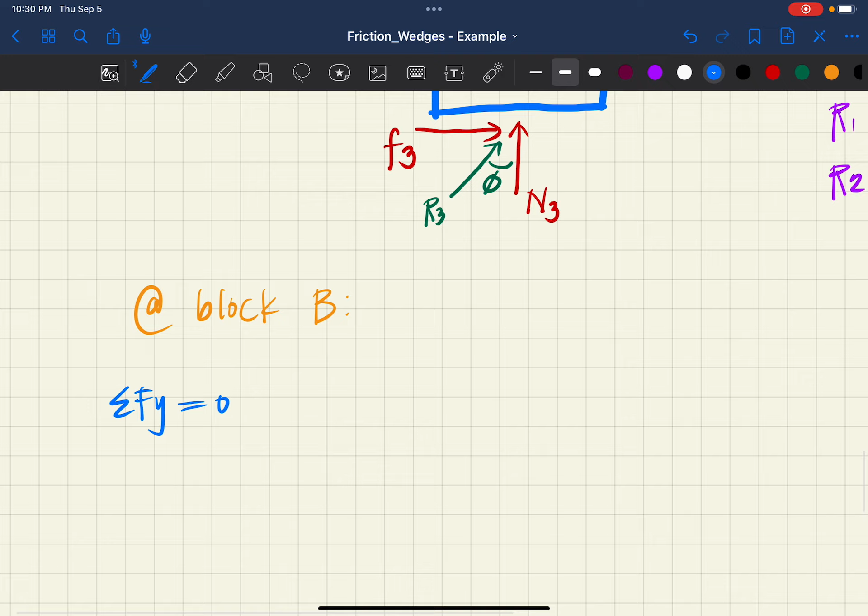Taking summation of forces along y-axis is equal to 0. Ang papasok dyan, R2, R3, yung 125 newtons. So, try natin. Unahin natin yung R2, may value na kayo ng R2, pero that is negative. Negative R2, at tandaan nyo, ganun din dito.

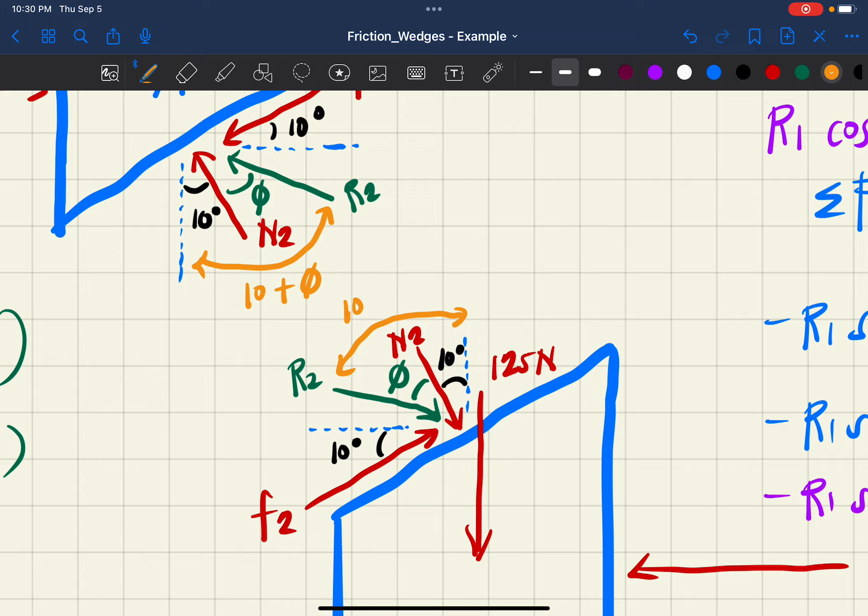Pagka pinroject nyo yung angle na to, makikita nyo na this is 10 plus angle phi. So, R2, cosine or sine along y-axis, that is cosine. Okay, sige. That is R2 cosine ng angle phi plus 10.

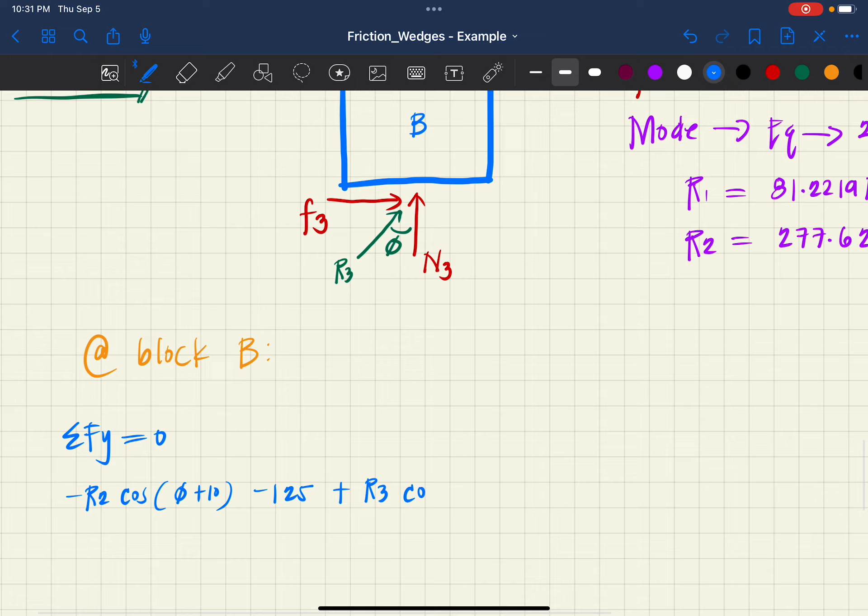Ano pa? Yung 125 natin, that is negative 125. Yung R3 natin, that is positive R3, and that is cosine ng angle phi, is equal to 0. Tatlo lang yan kasi kinonsider nyo na is resultant.

Palitan nyo yung R2 nyo kasi meron na kayong value nyan kanina, which is ito: negative 277.6295, and this is cosine angle phi na 8. Pag-addin nyo yung angle phi plus 10, that is 18.5308. Check na natin, correct.

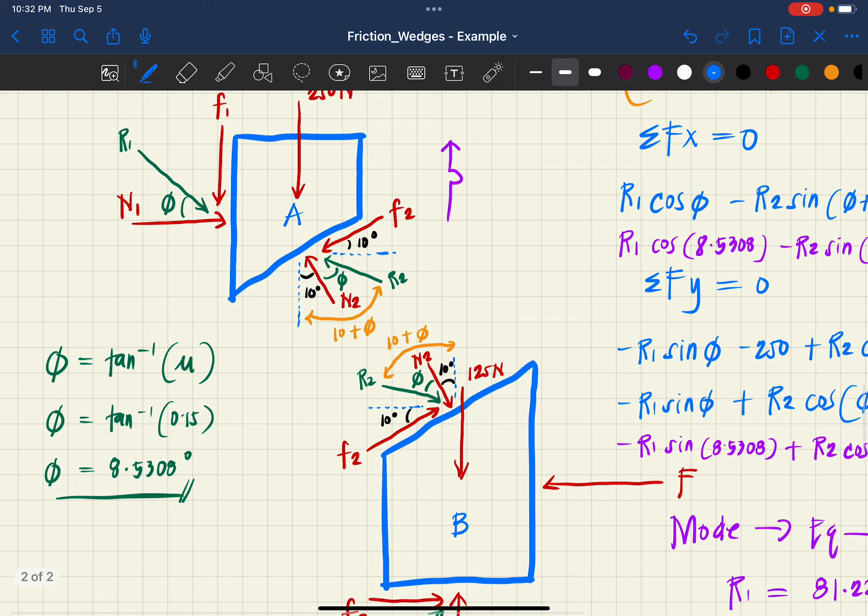8.5308 plus 10 that is 18.5308 minus 125 plus R3 cosine ng 8.5308 is equal to 0. To solve for that, lipat nyo sa kabilang side yung mga hindi R3 kasi positive na yung R3 nyo. Lipat nyo yan and then divide nyo both sides by cosine 8.5308.

So, let's try. R3 is now equal to positive 277.6295 cosine 18.5308 plus 125, over. I-divide nyo lahat by yung kasama ng R3 that is cosine 8.5308. So, may naiwan ba? 6295 cosine 18. So, wala naman. Therefore, what is R3?

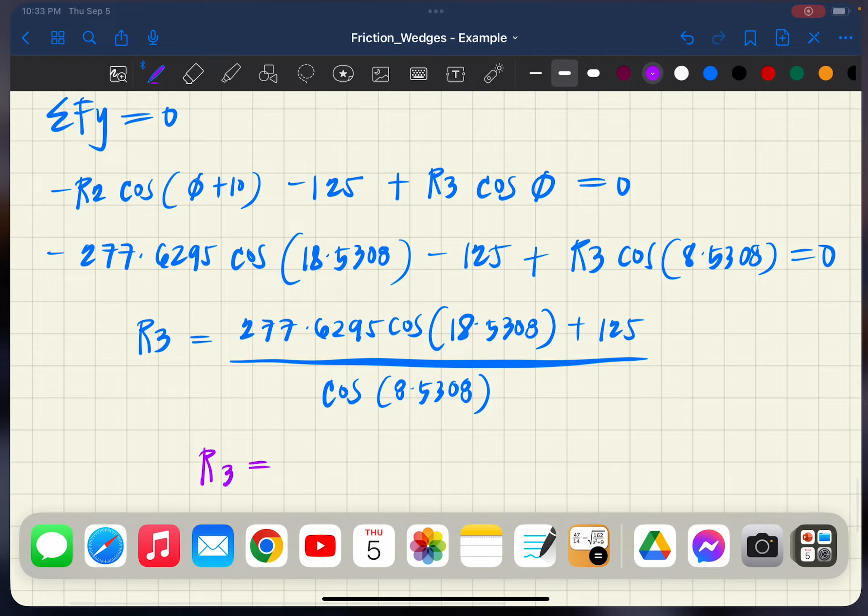R3 is now equal to, kunin nyo ulit calcu nyo, paki-input. So, mode, math tayo: 277.6295 cosine 18.5308 plus 125 over cosine 8.5308. Therefore, R3 is equal to 392.5786.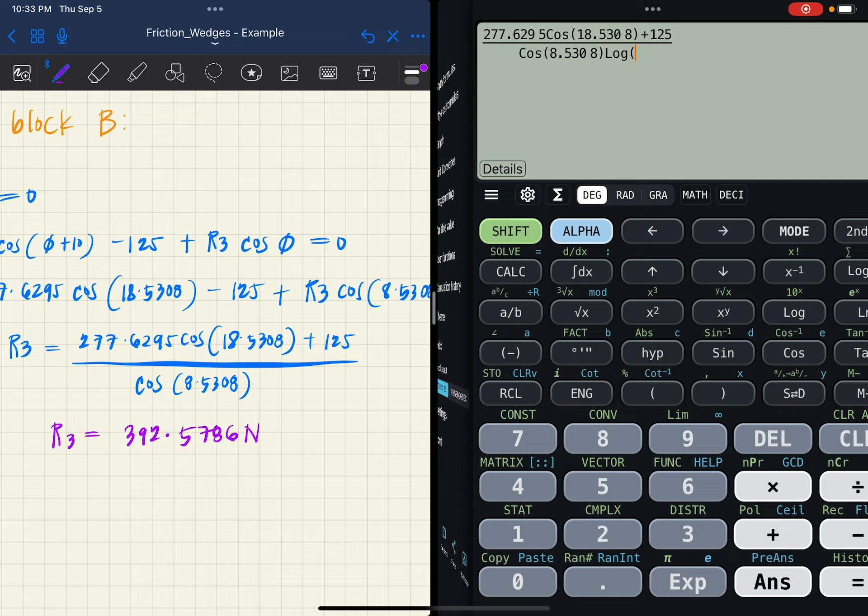5786 newtons. Ayan na. Since meron na kayong R3, pwede na tayo mag-take summation of forces along x-axis para makuha nyo na yung value ng F.

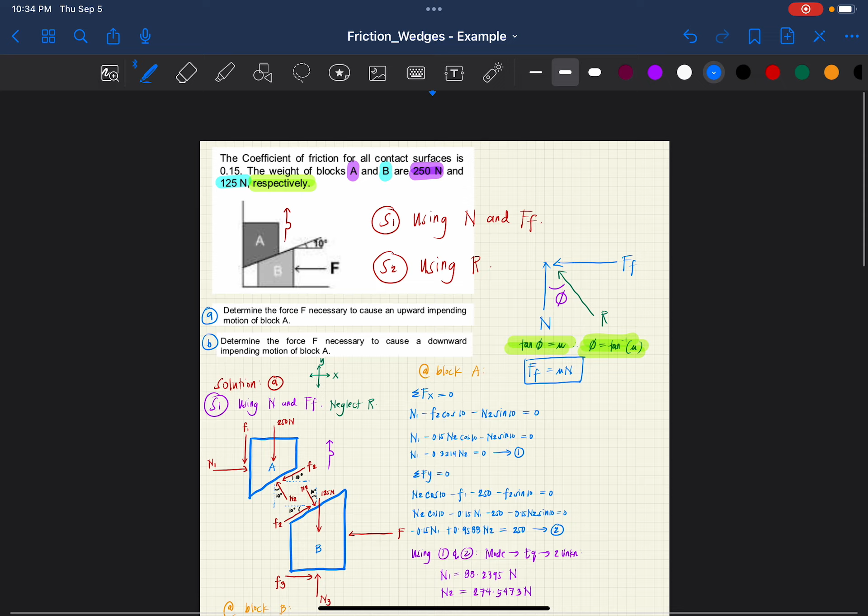And hopefully, parehas dapat sila. Kapag hindi nagparehas yan, uulitin natin lahat kasi may mali tayo sa ginawa. And medyo mahirap hanapin kung saan ka nagkamali dyan, pag sobrang haba na ganyan.

So, taking summation of forces along x-axis is equal to 0. Papasok dyan is yung F, yung R2 at saka R3. Unahin natin R2 at saka R3. Or pwede na may F, negative F. R2 is positive, pero that is sine ng angle phi plus 10.

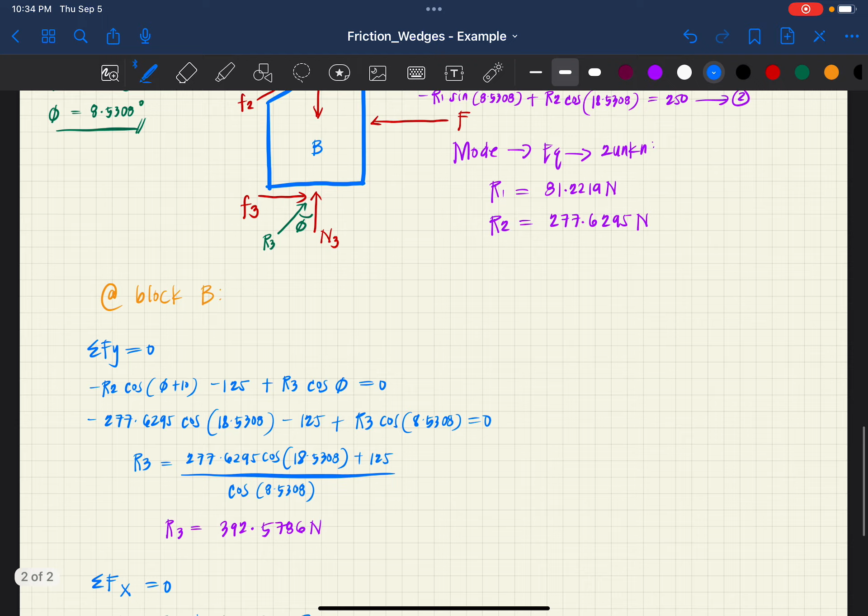R3, positive pa rin yan, R3, and that is sine ulit yan, pero this time angle phi na lang to, is equal to 0.

Substituting yung R2 at saka R3 na nakuha na natin. Therefore, lipat nyo na yung F sa kabila. F is equal to, what is R2? 277.6295, and this is sine ng angle phi plus 10.

Ilagay nyo na pala yung angle phi nyo, this is 18.5308, plus yung R3 na nakuha nyo lang, this is 392.5786, and this is sine 8.5308. Therefore, what is F?

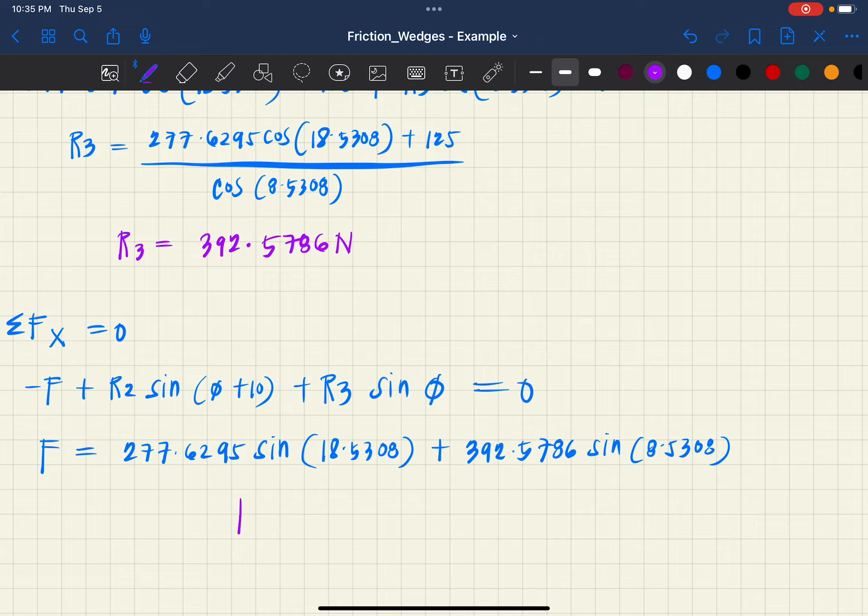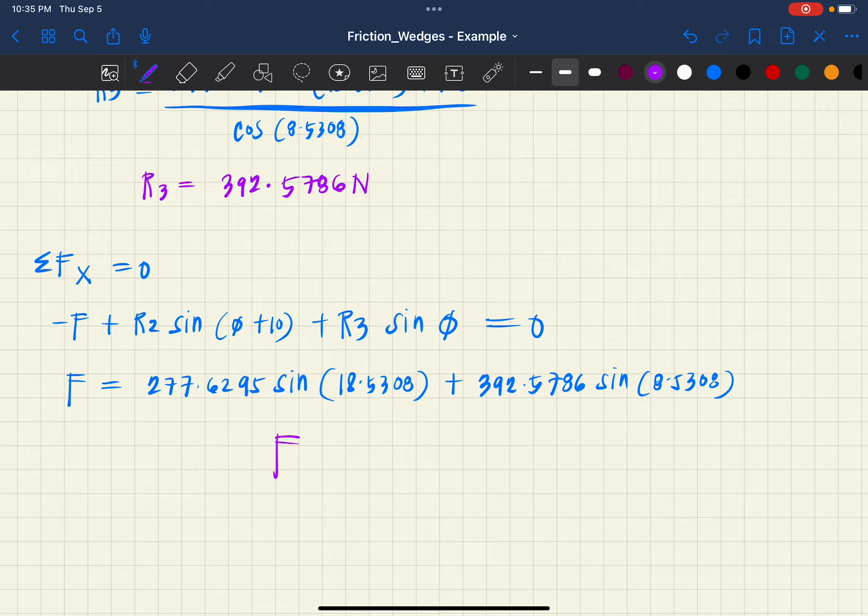Hopefully, parehas sila dapat, kasi pag hindi, saan tayo nagkamali dyan? Hindi naman natin alam. Lakihan ko ng konti yung final answer nyo. This is F is equal to, ayan, pwede na yan.

F is equal to, input nyo: 277.6295 sine 18.5308 plus 392.5786 sine 8.5308. Therefore, that is 146.4702.

146.4702 newtons. At tandaan nyo, ang nakuha natin sa una ay 146.46, dito naman 47. That's a bit of a discrepancy lang naman, small discrepancy lang naman, so that is acceptable. Parehas naman sila.

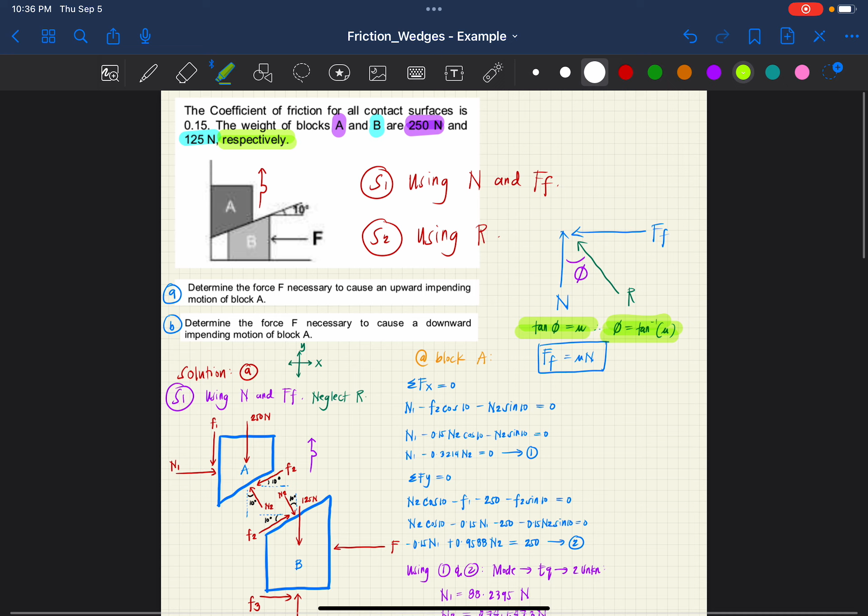Ganyan mag-solve ng wedges under friction. So usually, kapag wedges ang sinosolve, pwede nyo gamitin yung resultant R kasi hindi ko pa naman na-introduce yun sa inyo before. So ngayon na-introduce ko na, pwede nyo na gamitin yan.

So, sina-challenge ko kayo na i-try yung problem letter B na yan. Pero ang gagawin nyo sa problem letter B, instead, sabi ganun, determine the force F necessary to cause a downward impending motion of A. So kung magkakaroon siya ng downward impending motion, ganito yung magiging motion niya. And para maging ganyan yung motion niya, instead na pag ganito yung F nyo, pahila yung F.

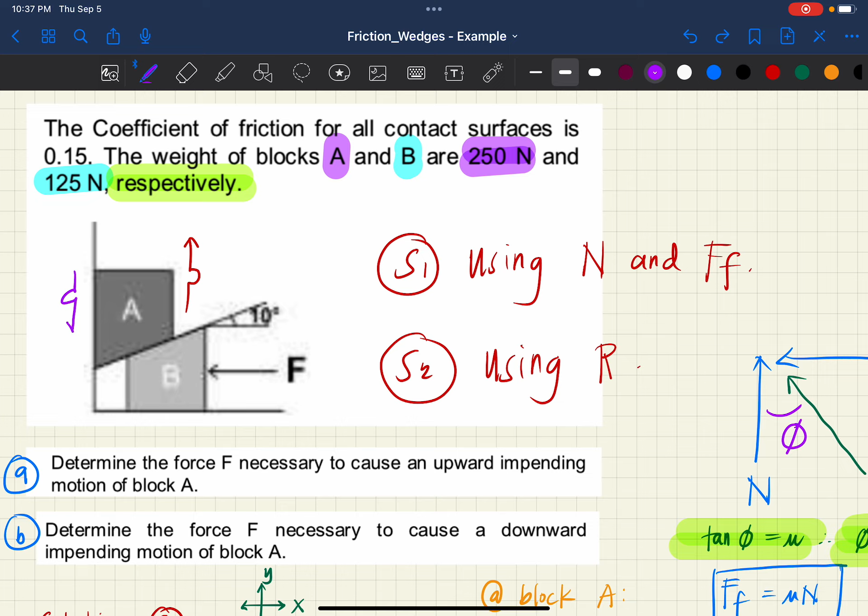In-apply pa rin naman siya. Okay, so magiging ganyan. Yan yung sa problem letter B. So pakitry, same idea, same concept yan, mababago lang yung direction ng F.

Okay, so hanggang dito lang yung discussion natin ng wedges, kasi paulit-ulit lang naman yan. Kahit anong problem, puro ganyan yung solution. So, I hope meron kayo natutunan kahit konti. Thank you so much.

Lagay ko pala dito na try. Ayan, try. Yan.